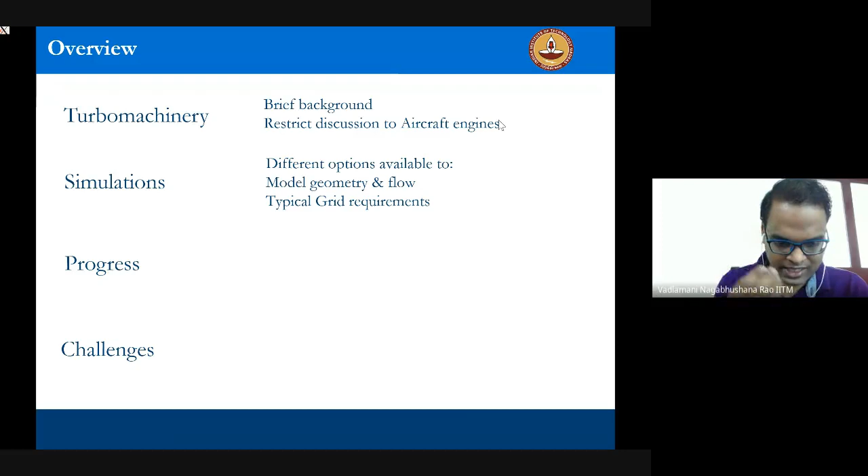Then we have simulations. By simulations we mean computational fluid dynamics simulation, CFD. If you know anyone who works on CFD, there are a variety of options available to us: the way we resolve or model the geometry, the way we resolve or model the flow. There are a variety of options available, and I'll go through some of these options available to you as a CFD practitioner, and the typical grid requirements required for high-end, high fidelity simulations. Let this terminology become more and more clear to you as we go through the talk.

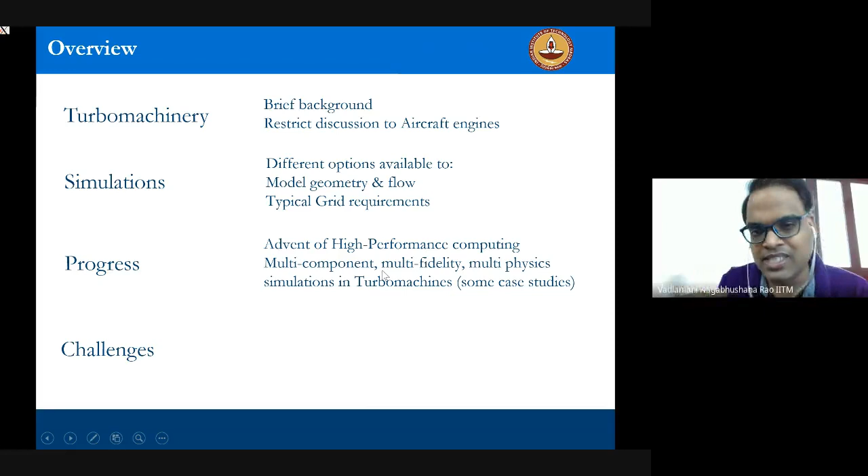In the third section, we will get into the progress in this field, turbo machinery simulations. Over the last 10 to 20 years, there has been a massive boost in high performance computing facilities across the world, and how this HPC has transformed simulations completely. We will also look at some case studies in which I was actually involved, doing hands-on simulations of some of these components. I'll share my experience handling multi-component, multi-fidelity, multi-physics simulations in turbo machines. Finally, there are way too many challenges which we as CFD practitioners, and in the turbo machinery field, face. As we move through all of this, I'll keep addressing some of the challenges, but at the end I'm also going to summarize them. It's a really exhaustive list, and I'm not going to get into each and every detail. So this is the overview of the talk.

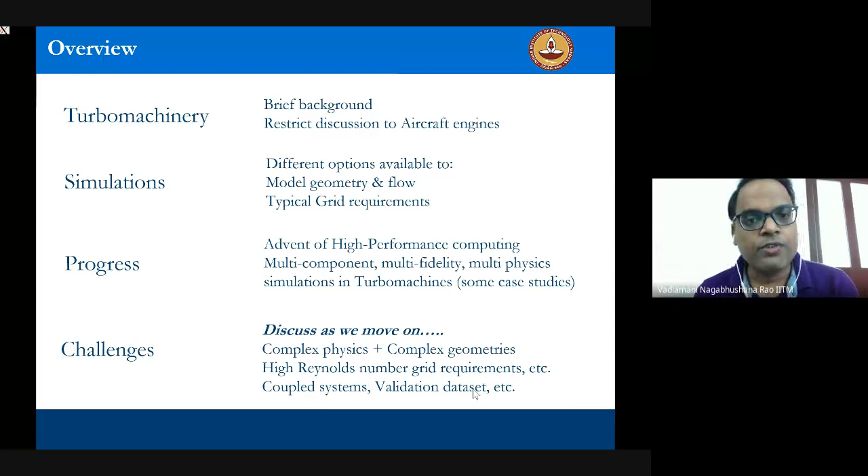So let's start off with a background on turbo machinery.

Yeah. Okay. Right. So you usually encounter turbo machines in a variety of applications.

You usually encounter turbo machines in a variety of applications. The first one you will see, while boarding a flight, is a gas turbine engine installed right underneath the wing of an aircraft. That's a simple aircraft engine. You could also have land-based engines used for generation of power, like a land-based steam turbine - Siemens is the largest manufacturer of such engines. There, weight is not a critical issue since the engine isn't flying in air, whereas in the case of aircraft you should be worried about weight. It should be light enough and still generate the required power. Apart from these applications, you will also see some tidal turbines for renewable sources of energy.

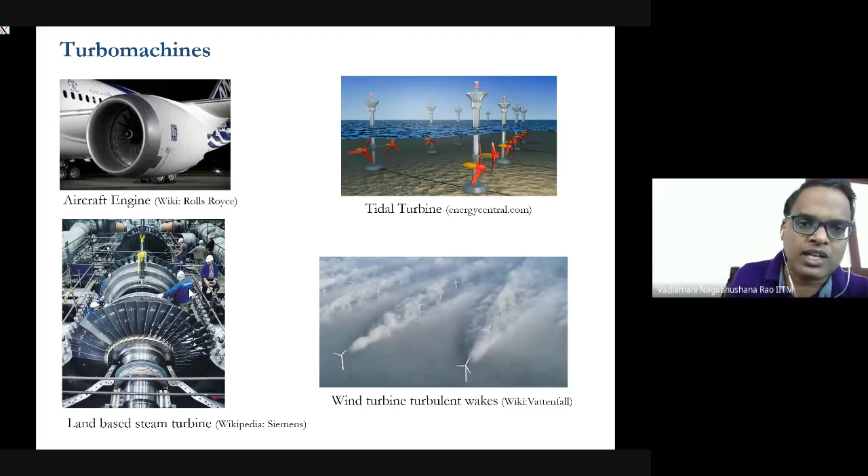There is a massive drift towards renewable sources of energy, with many groups across the world working on tidal turbines to harvest energy. We also encounter wind turbines, and there is a lot of interesting physics involved in how to install these wind farms in open areas. So there are a wide range of applications - this is not an exhaustive list, but just to give a brief idea. Even in the space industry, turbo machines are used for pumping the fuel and oxidizer to the thrust chamber of the rocket. But let's constrain ourselves to discussing the aircraft engine.

If you cut open that aircraft engine, you see a nice outer casing and a lot of rotating components inside. It looks a bit more complicated inside, but to put it simply, the outer casing tries to supply really clean inflow to all the components. This basic engine is simply breathing in air - it breathes around 500 kilograms of air in 1 second, sufficient enough to make a squash court vacuum in a second. The intake up front tries to supply a very clean airflow. If there are some disturbances, they try to die down in that little section up front, such that all downstream components see a clean airflow coming in.

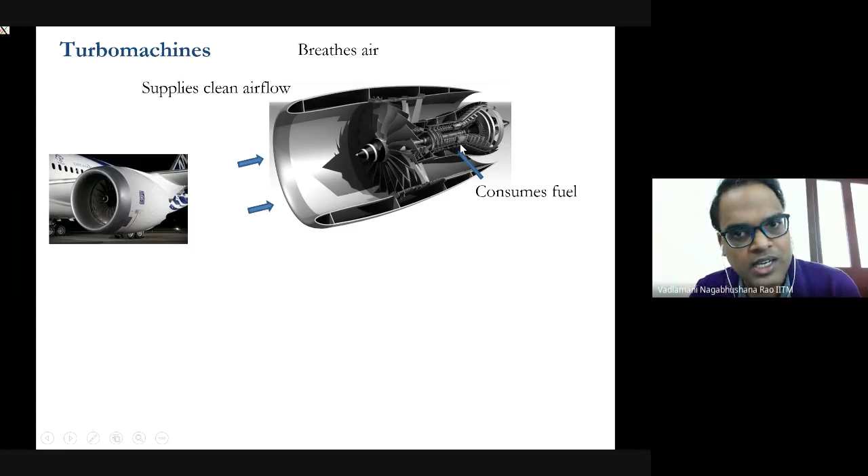Then it also consumes some fuel inside, in the combustion chamber, and we finally extract the energy because we have increased the enthalpy. We convert that available enthalpy into kinetic energy, and we extract that energy. That extracted energy is again used to breathe more air. So looking at the components that do this whole job: the component which supplies the clean airflow is the intake, the component breathing huge amounts of air is the fan, the component consuming the fuel is the combustion chamber, and the component extracting the energy is the turbine.

So for us, the key turbo machinery components are the rotating ones - turbine and fan. These are the key turbo machinery components. And we can't leave the intake alone, because any dynamics happening over this intake will also affect the fan downstream.

The brief background is the turbine is the component which is extracting energy. There is energy already available in the flow, and the turbine is extracting energy out of the flow. Whereas the fan or compressor uses whatever energy is extracted from the turbine, and that fan tries to add energy to the flow. It's very simple - turbine is extracting energy from the flow, and fan is adding energy to the flow.

This airflow passing through this engine is going to affect the performance of each of these components. Someone has designed all these components, and the airflow through this engine is going to affect the performance. As turbo machinery engineers, CFD practitioners, we are all interested in working towards a common goal.

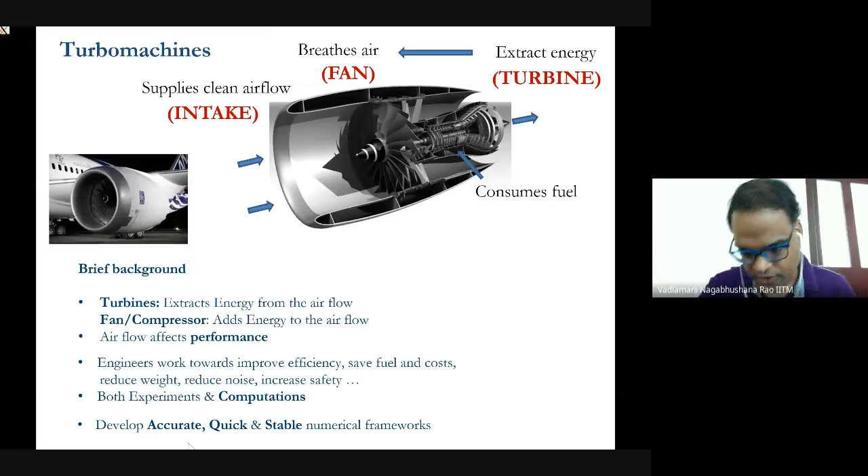That is the brief introduction about the turbo machinery, and what our common objective is.

Now we just talked about the three key important points: accuracy, speed, and stability of a solver, while performing the simulations. These are the three important points. And in this front, let us look at what are the different options available to us in terms of modeling the flow and modeling the geometry.

If you open a tap in your house, you will see that if you marginally open the tap, the water stream which is flowing out is very stable, and it doesn't have too many structures, and it's very well behaved. Or if you are dropping some oil, you will see that the flow is entirely sort of well behaved. So that's a laminar state.

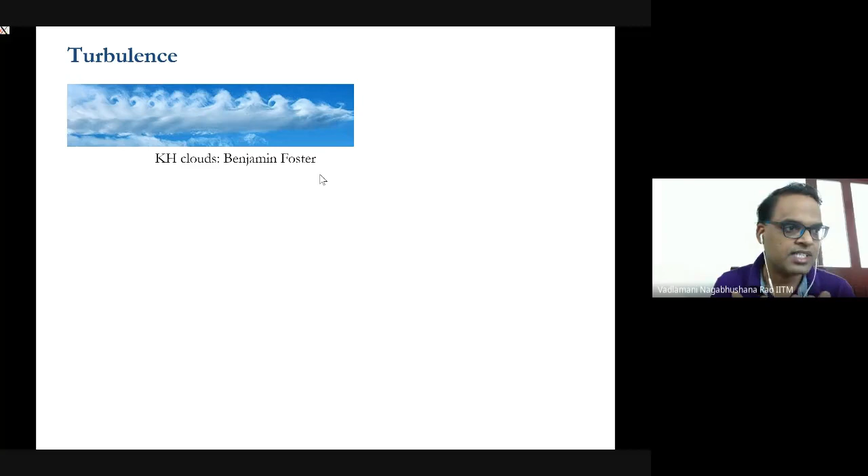However, if you think of an engine which is breathing in 500 kg per second of air - in 1 second, it's breathing in 500 kg - then you don't expect to see too much of such smooth kind of flow going inside the engine. You will see a lot of turbulence which is getting generated across all the components in the engine.

You see such kind of turbulence in nature, for example, clouds, KH rollers across the clouds, or some agarbatti smoke - you see some nice laminar region followed by transition to turbulence. Even a candle plume, where you can see a nice candle plume, which is all laminar, then there is some instability followed by breakdown to turbulence. Also the example of the wind farm I gave - initially you see some structures developing, but after you go further downstream, the flow becomes more and more turbulent.

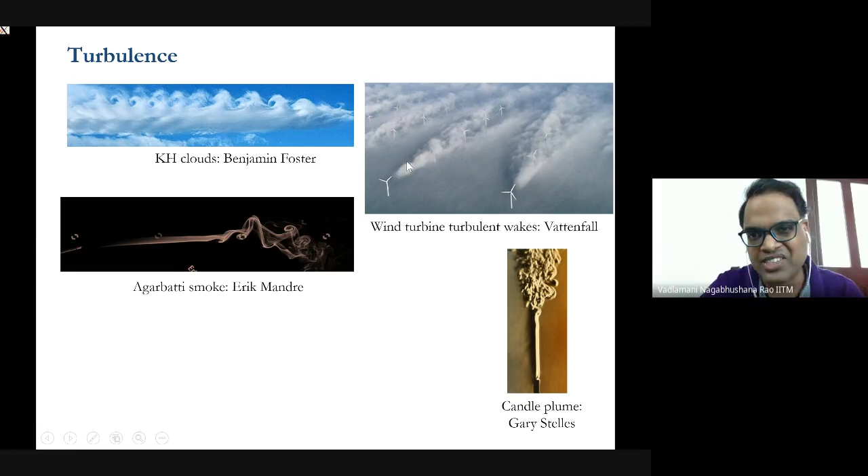Okay, so each of these wakes will interact with the downstream wakes, and it becomes a really complicated flow. So one thing which comes to our mind when we talk about turbulent flows is there is a lot of mixing involved. It's very rich in physics. There are a lot of spatial scales. This is varying very quickly in time, right?

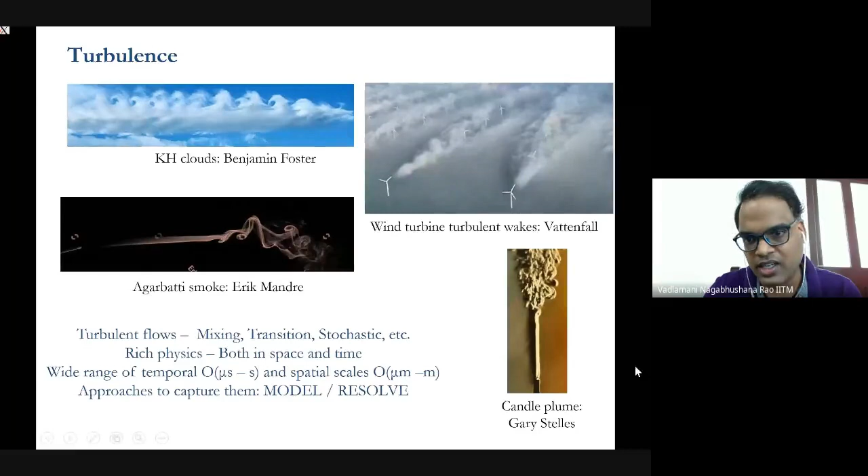So in order to address this turbulence, we have two approaches. One is you can model the turbulence, or you put a fine enough mesh to resolve the turbulence. Okay, so let's look at these two strategies now. And the turbulence, whatever I have shown here, is turbulence encountered in nature. So similar things happen in turbomachinery components. For example, over the turbine blades or on the compressor blades, you see a lot of chaotic flows developing.

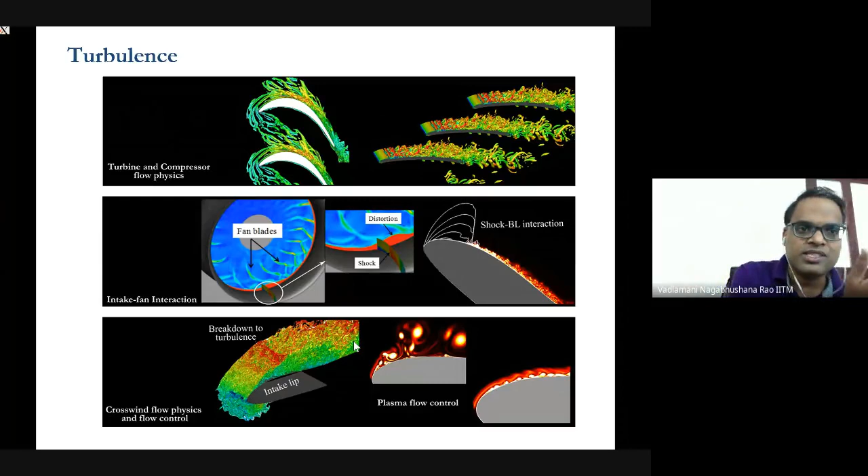Say even on the intake lips and the fan blades, you could have shocks inside the engine over the intake lips or on the turbine blades, right? So you will have shock boundary layer interactions. So there is a lot of interesting and complex physics happening across all these components. And say over the intake lips, you see some massive separations, and again it can generate a lot of turbulent flow. Okay, so the basic takeaway from the slide is whatever turbulence you're seeing in nature, you also see on the turbomachinery components inside the engine.

Now, even for the geometry, right? So

Hello, sir, your audio is not coming.

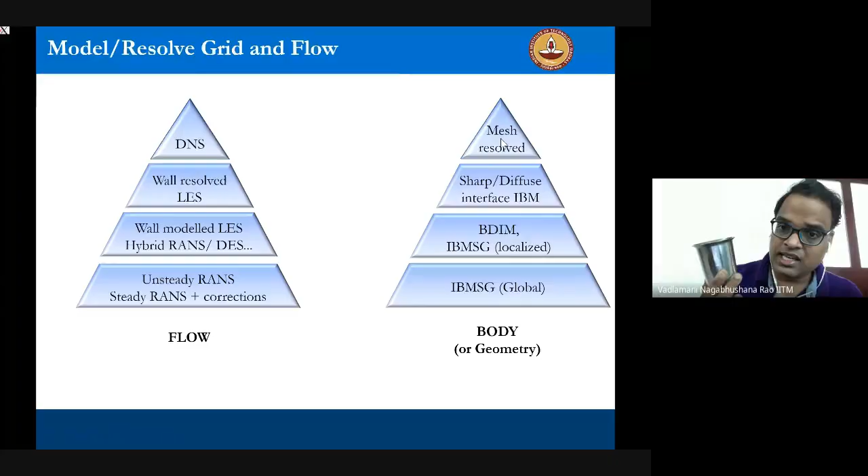Is there some question? Yes, sir. Your audio was not coming in between, but now it is coming. Oh, is it? Okay. Am I audible now? Yes, sir, you're audible. Okay, thank you.

So say, instead of putting a mesh around this glass, I say that there is a hypothetical glass here. And if I have a flow over this glass, we know that the flow should deflect, right? So instead of putting a glass, I can as well create a hypothetical force there, which represents the shape of a glass. Okay, so such kind of methods are called immersed boundary methods. So in turbomachinery, there is one more class which is called IBM-SG, which is immersed boundary method for smeared geometries. So we will look briefly at that interesting class of immersed boundary method.

Okay, but the bottom line is we have different methods for capturing the flow. We have different methods for capturing the body. At the bottom of the pyramid, you are modeling the grid or modeling the flow. And on the top of the pyramid, you are either resolving the grid or resolving the flow. So when you move up the pyramid, you are increasing the accuracy of your final solution. Whereas if you come to the bottom of the pyramid, then you are decreasing the cost of the simulation. So you are compromising; these two are not going hand in hand.

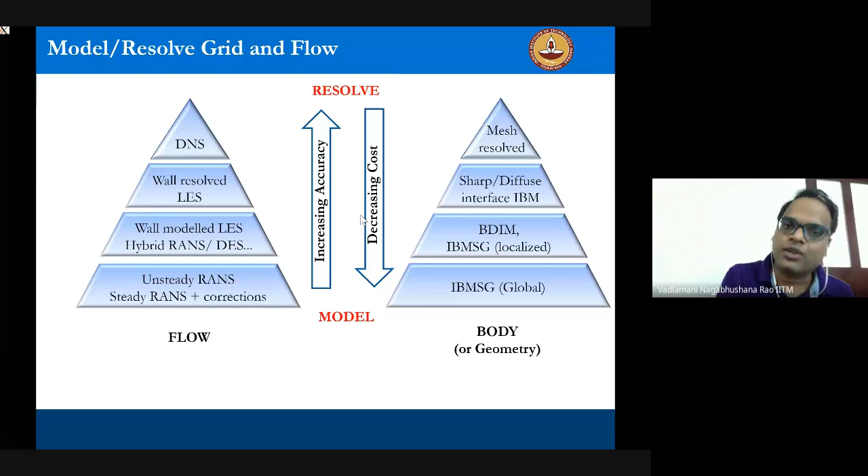Okay. But the good thing which has been researched over the last 15, 20 years is, can we use some different combinations of each of these, right? So I will use different strategies for the flow, different strategies for the body, right?

So can I mix and match across this pyramid? There are a variety of papers. If you go through turbomachinery literature, you will see a wide range of papers which are mixing and matching how they resolve the flow and how they resolve the body. But 20 years earlier, everyone was at the bottom of this pyramid. We didn't have enough computational power to actually hit the top of the pyramid.

So accuracy versus speed, as I mentioned, is a trade-off. For whatever application we are looking at, we should worry about how much I can compromise on accuracy and how much speed I will get. Right. So in terms of the flow, let's look.

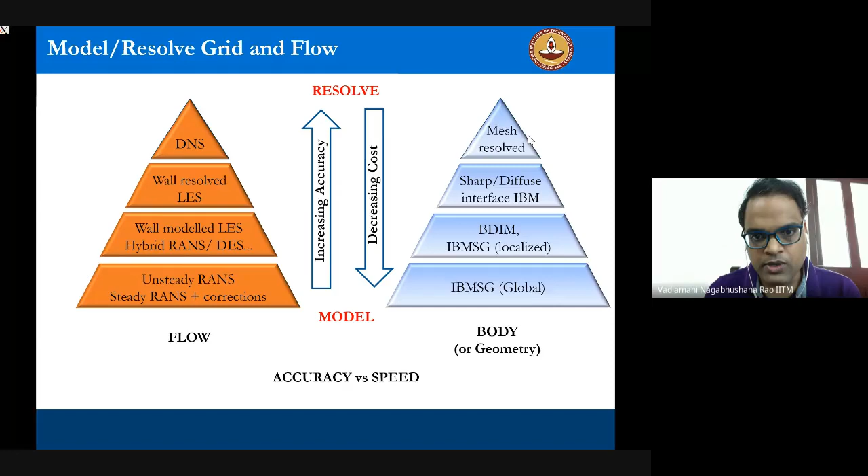Whereas if you say, hey, I don't want to resolve all the scales, I will do some modifications. I will simplify these Navier-Stokes equations, I'll average them, do some Reynolds averaging, etc. Then I mess up those standard Navier-Stokes equations and introduce some new modeling terms. What you end up getting is the steady Reynolds-averaged Navier-Stokes equations, or if you relax some of those modeling constraints, unsteady Reynolds-averaged, right? But you clearly see the distinction: as you move up the pyramid, you are resolving more and more.

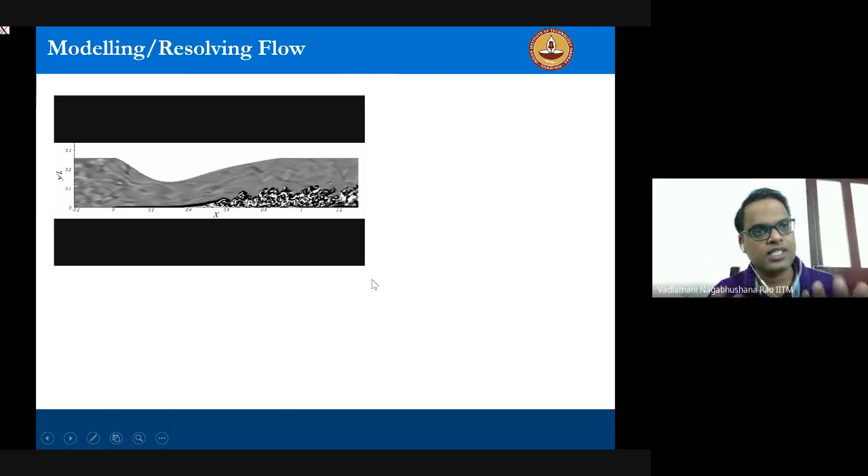So what are all these structures I'm showing here? These are nothing but vortices. On day 2, Professor Samin introduced you to vortex dynamics and how they were capturing some axial vortices. All this turbulence is characterized by a lot of coherent structures called vortices. You can imagine these vortices as a bunch of fish of different sizes. If you want to capture these fish, we simply put a net on them. Similarly, in a turbulent flow, to capture all these vortices you simply put down a fine enough mesh.

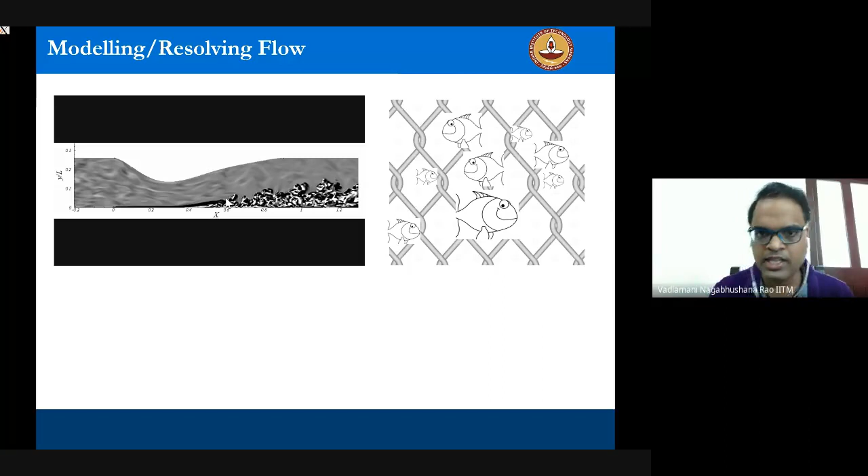Now at each and every point on this mesh, you are going to satisfy these highly coupled nonlinear equations, the Navier-Stokes equations. If you resolve all the fish, up to the smallest size, if you have put a fine enough mesh that you are capturing even the smallest fish or the smallest vortex in your system, then it's called a direct numerical simulation.

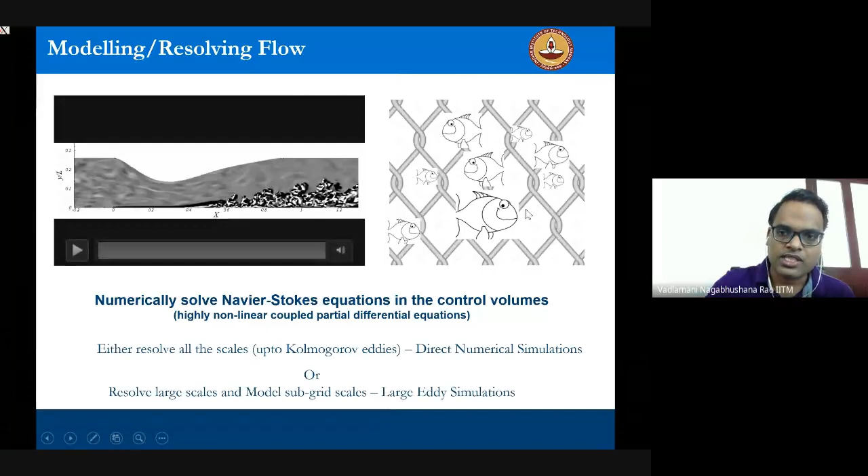If you say, hey, I really don't care about all the small vortices, maybe they are not contributing much towards my accuracy, I would rather capture only the large fish or the large vortices. And I can put in some model which says this much energy is being carried away by vortices which I'm not resolving. Such approaches are called large eddy simulations, where we only capture the large scale vortices, which means the large fish. So this is a brief idea about the pyramid, the way of capturing the flow.

And over the recent years, there have been many tests which have been done from the bottom of the pyramid and from the top of the pyramid, different approaches. Okay. So what they have observed is, this is a simple example of a labyrinth seal used in a turbomachine, near the high pressure turbine region, where they wanted to measure some radial variation of some velocity.

They used so many different models. On the bottom of this pyramid, people came up with so many different models, and this is quite a challenging flow. There are many models, like k-epsilon, RNG, RSM, SST, different varieties of SST. But what you can see is, when compared to the experiments, you see a large scatter in the results. So the reliability, the accuracy, is obviously taking a hit here. And the models, whatever are developed, are not applicable for all the flow scenarios.

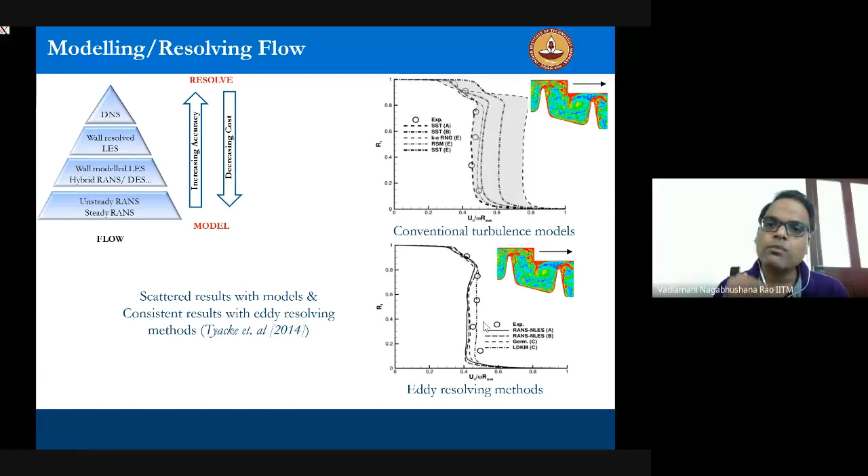Whereas if you are increasing the resolving component, say even if you are going up to wall-resolved LES, you see the scatter in the predictions has decreased. So the community is more and more shifting towards resolving the simulations more rather than modeling. Now, how much can we resolve? Those scales, whatever we are generating, what does that depend on?

That obviously depends on how fast the flow is moving, right? That is quantified using the standard Reynolds number. Reynolds number, we know, is the ratio of the inertial forces to the viscous forces. So if the inertial forces, which means if the velocity or the length over which the flow is happening, is really large, then it is going to generate more and more vortices, more and more turbulence is getting generated.

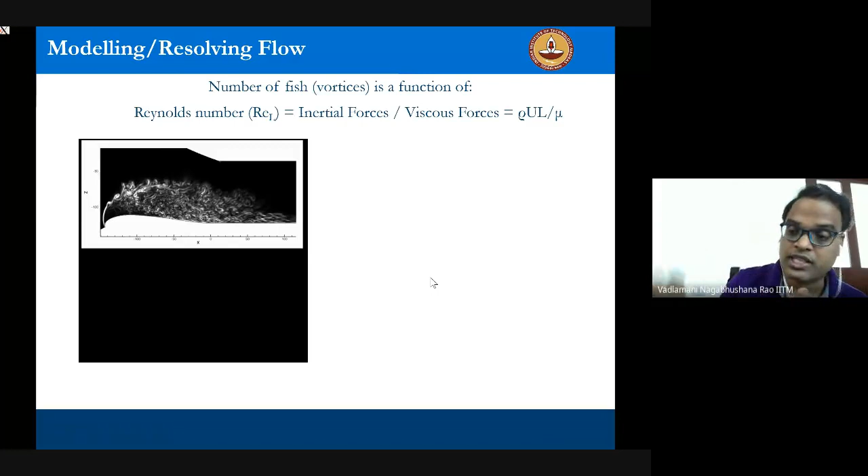So as you are increasing the Reynolds number, the number of vortices which you are generating is increasing proportionally. Higher the Reynolds number, the wider is the range of spatial scales and temporal scales which we have to resolve. And what does that mean? We have to put more and more mesh into it. As a typical estimate, going back to the pyramid, on the top of the pyramid we need almost Reynolds number to the power 2.6 as the total number of grid points to capture the flow accurately. If you are introducing more and more modeling, you keep on reducing this exponent.

Whatever simulation I have shown is only on one little component, and that's where we spend a lot of mesh. But if you want to do some multi-stage simulations where you have a fan, a turbine, a compressor, a combustion chamber, the kind of meshes we are talking about is of the order of 1 billion plus.

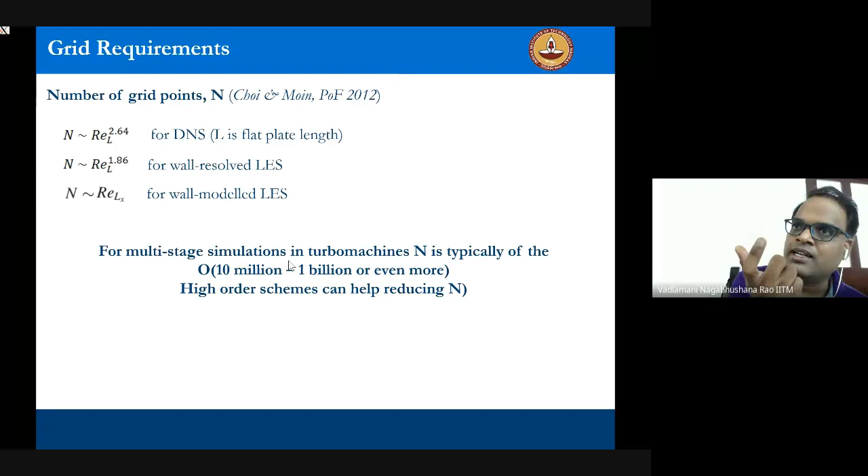And in this situation, when we write a derivative in our Navier-Stokes equation, say partial u by partial x, if I write it as u(i+1) minus u(i-1) divided by 2, that is only giving me second order. If we can make it a higher order stencil, go up to 4th or 6th order, then we can capture more detail using less mesh. That's where high order schemes are getting used in modern day solvers. They want to efficiently use the computational resources to capture these flows, and that's where high order schemes are playing a really big role.

So this n, whatever we have, if you go for high order schemes, can drop further. Now if you look at the grid count which is required for different turbine zones. I talked about the turbine which was extracting the energy. That turbine can be a low pressure turbine, further down in the engine, or it can be a high pressure turbine which is further up, right?

There could be some cutback trailing edges, some cooling ducts, some rim seals or labyrinth seals. So there are different components in that turbine, and each of these components has a completely different Reynolds number.

So the grid count is absolutely different for each component. This plot nicely shows, when talking about different components, as we bump up the Reynolds number, what is the typical grid count needed to resolve the flow accurately. There is an estimate given in literature. I'm not going into the details of how this is done, but there is some sort of reference.

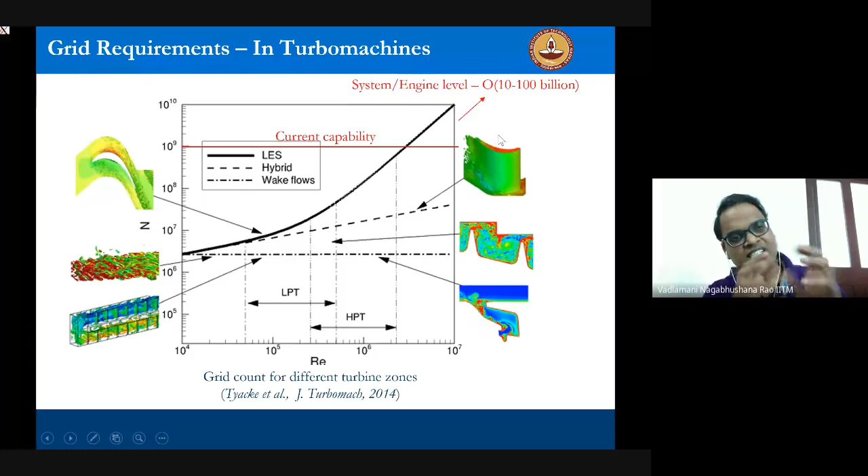This was never the case, say 20 years back. No one would have thought of running a billion cell calculation. But still, with this current capability, we are only able to handle stage level simulations. If you want to capture the entire engine, you're talking about 10 to 100 billion grid points to capture the entire engine in great detail.

So that's all about modeling the flow. Now, when it comes to modeling the geometry, there is this interesting bit called IBM SG, immersed boundary method for smeared geometries, which is particularly relevant for turbo machinery. For example, if there is a fan and you want to know the force field over all the blades, these blades are spinning at a really high speed.

When these are spinning at a really high speed, we can make an assumption that we can consider these blades to be infinitely thin, and the circumferential variation of the force field can be neglected. Under such conditions, I can come up with some axisymmetric geometry. So what does this blade do? It takes the flow axially and turns that flow by some angle, and I should somehow hypothetically create that deflection using a force field.

Which means we are smearing off all these blades - there will be no blade at all. We will not consider any blade, but we will create the effect of the turning by means of some body force. That body force is going to be circumferentially uniform, so whatever force is seen here is the same force seen across any angle. This is called a smeared geometry.

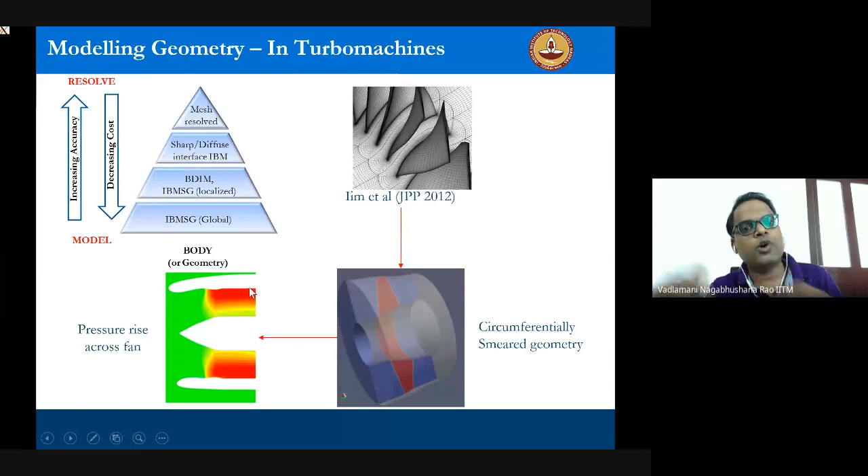So this is one aspect of modeling the geometry, IBM SG. Then the other issue is, all the simulations we currently carry out assume that all the surfaces are absolutely smooth. That's only true when a manufacturer simply deploys the blade - when it comes out of the manufacturer, it's all very smooth, it's amazing. All our analysis, whatever we have done on smooth meshes, is valid for that.

So the current simulations are also trying to look at the effect of this surface roughness on the aerodynamic characteristics of this blade, that in-service degradation. How is the performance going to degrade as these blades keep deteriorating in time?

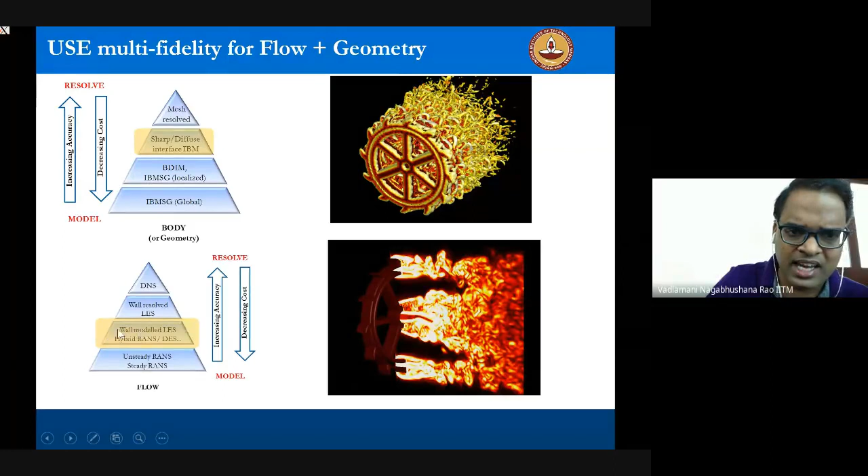And if there are some complex geometries, then you can use something called sharp interface IBM, or you can also go for mesh resolved approaches, where you put a finer mesh around the body. As I mentioned, in this specific case it's a toy case which I tested, wherein I used some wall model LES or a hybrid RANS-LES for the flow, and I used a sharp interface IBM for representing the body.

So you can appreciate the features of the kind of turbulent flows which eject from that whole simple geometry. So that is all about the simulations.

So in simulations, what we saw was what are all the options which are available to us, and how fine the grid which I use for this simulation should be.

Now let's get into the third aspect, which is the progress. So the progress actually started, and it has taken a steep rise in terms of turbo machinery simulations ever since the advent of high performance computing. Parallel computing is the key for the progress turbo machinery field has made in the last 20 years. HPC plays a major role.

So it is not sufficient enough for you to be an expert in turbo machinery alone or fluid dynamics alone. You should be an expert in fluid dynamics, you should be an expert in turbo machinery, and also HPC, which involves a lot of computer science, like how you optimize your solver.

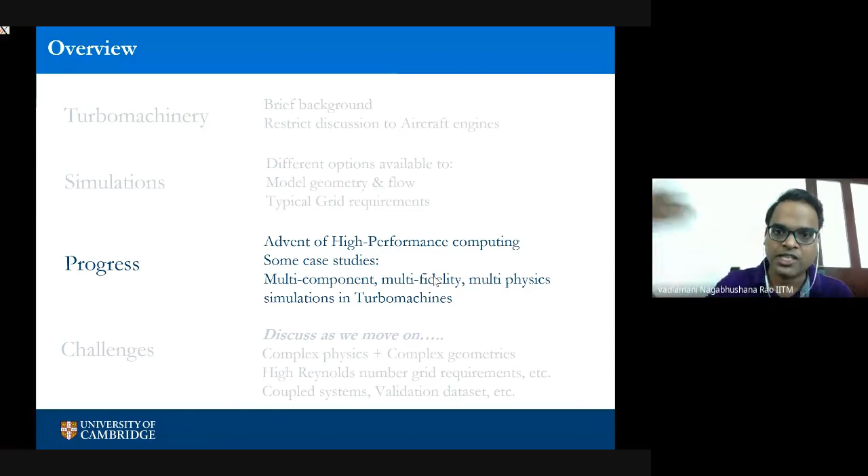So let's look at what happened with HPC in the recent years.

And then you set different boundary conditions on all these boundaries. If you are talking about a billion points, or even say 30 million grid points, and you try to run it on your laptop, what happens? Can you run 30 million grid points and solve all these five equations on your single laptop? Can you? No. Why? What limits it?

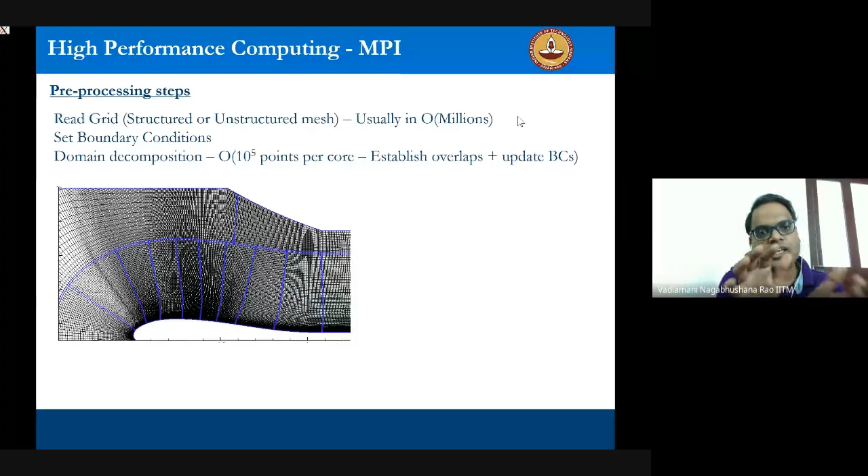So the amount of memory which a computer has to work on, the amount of work assigned to each computer is limited, and that is limited by its memory. And that memory is, according to that, we can split this block. So we create different blocks.

Now if you look at the close-up view of this block, you will also see some overlaps here. We are actually having some ghost cells to get the information. We are peeping into the other block to get some more information and maintain some high order accuracy.

So we are literally splitting, we are domain decomposing. We are decomposing this domain into multiple blocks, and each computer will get its share.

Now what should the computers do? So if I'm solving the Navier-Stokes equations, at some time instance I will stop the flow, I will pause the simulation, I want to see the flow on this. So what should the computers also do? Is it sufficient if they simply compute all the Navier-Stokes equations in just the box assigned to them? Is it sufficient?

No. What else should they do? What is their other job? They should also store the data, across the interfaces, right? So across these interfaces, they have to store the data, and they should also talk. These computers have to talk with each other, saying, hey, this is the interface data which I have, this is relevant to you. And the other processor also says, yeah, I have some information from my end which I have to share with you. So each of these processors also have to talk.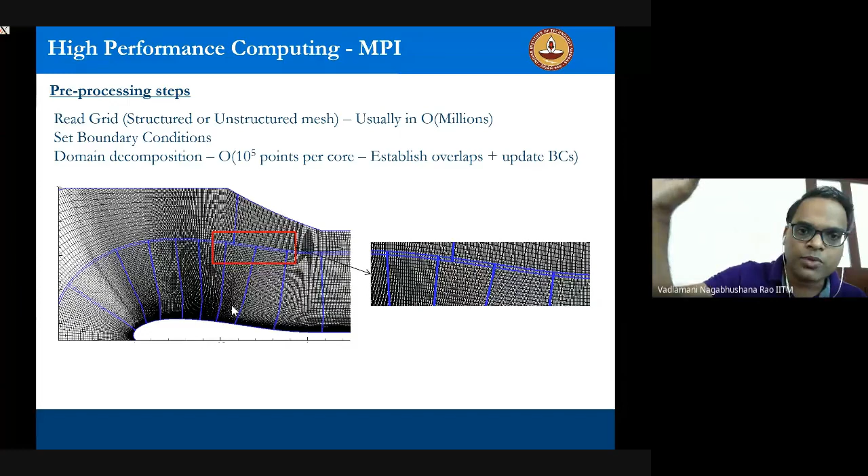So they compute and they communicate. There are two aspects to this. Ideally we will get a good speed up, and we can solve this problem properly. When if this problem is put on a single computer, say if it was possible, then we finish the job in say one day. Now I put the same job on 24 computers, I should expect to get the job done in 1 hour. That is the ideal scaling. But will we get the ideal scaling?

We don't, because it is not just computing. They are not just computing alone, they are also talking. Because they are also talking, if each computer is independent, then it's fine, you will get that nice 24x speed up. But because there is communication involved, you will not get a 24x speed up.

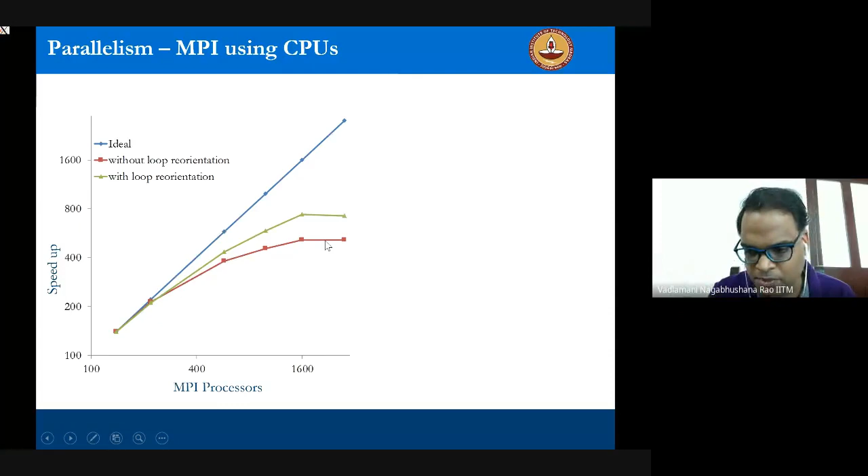So if you take this domain and keep on decomposing more and more, what happens is something like this. Here I am dumping almost 1600 processors for that problem, and surely I'm not getting that 1600 speed up. I'm actually getting only 800 speed up. Where is the other speed up gone? That speed up is gone because the job, whatever computation the computers are doing, has decreased. The amount of talking which they are doing has increased. So the communication has increased and computation has decreased.

So this is the bottleneck which one would hit when talking about message passing interface. This whole process, whatever I told you, is nothing but the message passing between the computers. So you can parallelize any of your solvers using this, but at some point you will end up with this computation versus communication issue.

What is the other strategy? The other strategy is there is one massive memory. I give one big memory, which is a shared memory. All the processors, whatever data these processors require, is put into that memory. So that's a shared memory parallelism.

And one of the really interesting recent developments in this front is the use of GPUs, the graphical processing units. Traditionally, they were introduced for gaming purposes. If you are a really good gamer, you want good graphics, and you would have bought an NVIDIA graphics card. So all that it does is it's a co-processor. When your game is running, it sees it's a code. The game at the end of the day is a source code, so there is a code running in the background.

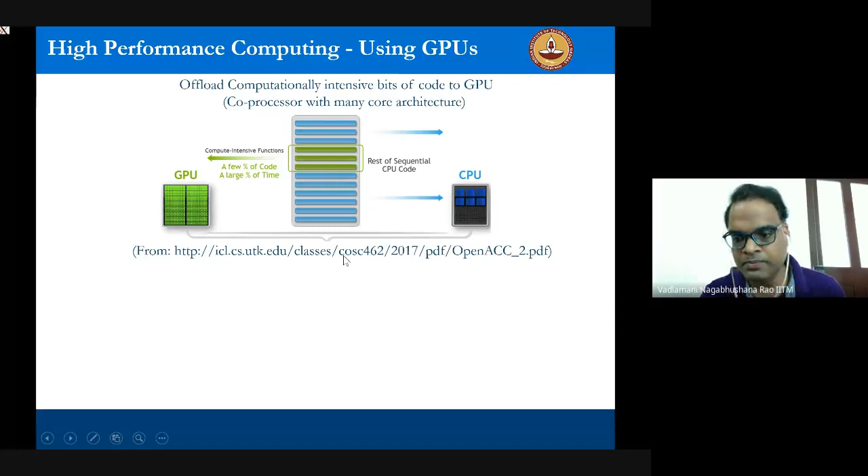But here also we have another issue. The CPU has its own brain and the GPU has its own brain. So the CPU has to transfer whatever is in its memory to the GPU, and then only the GPU will compute, and then whatever has been updated in its memory will be transferred back to the CPU. That's how this whole system works. We don't want too much of this data transfer, because these two are talking, CPU and GPU, too much. Under such conditions, we will hit the performance. There is a performance penalty.

So it's a similar issue which we had in MPI. All the processes at some point keep talking and do little work.

The latest strategies are, the GPU is also limited by memory. You can only put up to some 15 to 20 million grid points, but whatever we are talking about is of the order of billions. So you need more GPUs, and you also need more CPUs to handle them. That's where this hybrid parallelism is one of the recent progress happening in the field, where you use both MPI parallelism and GPU parallelism, and each CPU would be assigned to one GPU.

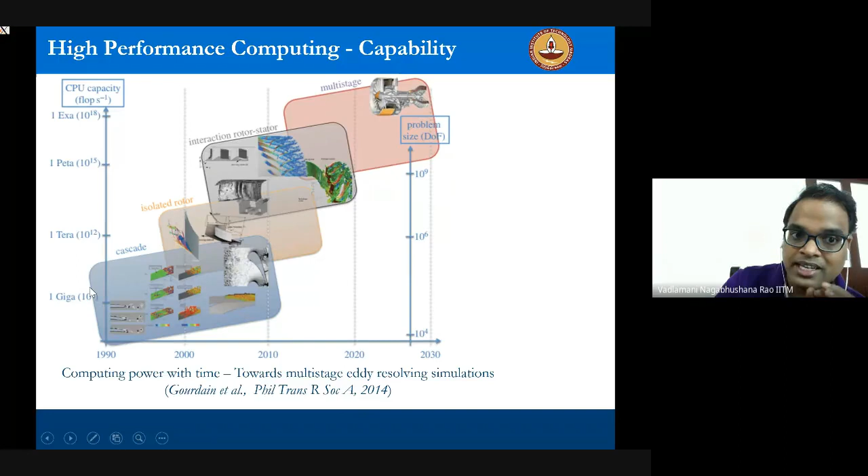Say, once you read the grid, you want to compute the volume of each cell. There are a lot of multiplications involved, a lot of additions, subtractions, a lot of things involved, and each of them is counted as a floating point operation. So this number is telling how many floating point operations can be done in 1 second, and how that evolved over the last 30 years or so.

Traditionally, say in 2000 or something like that, we were only able to carry out simulations in a turbo machine which could handle just a little section of a blade, using some eddy resolving approach. So you are at the top of the pyramid, but with that you can only handle one little section of the blade.

With the current scenario, you can very clearly see there are some rotors, 2 or 3 rotors, 2 or 3 stators. So you have some rotor blades and some stator blades. In turbo machinery, you have some stationary blades and some rotating blades. These two put together is called a stage. So you can at least go up to a single or 2 stage calculations with the current computational facilities.

So 1 to 2 stage simulations, with some rotor-stator sort of arrangement. You can go up to some 1 to 2 stage simulations with the current computing capability which we have, and that is like 10 power 15. So currently we are talking about, say, if you look at the cluster in CDAC, Param Shavak, or that's Kharagpur, I think, but I forgot the name.

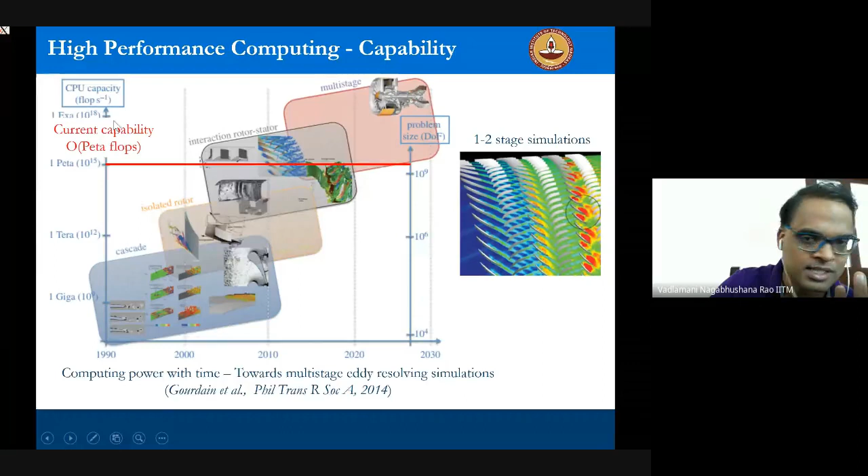And this is still really thirsty - this is our current capability. With this, we are only able to handle 1 to 2 stage simulations. But if you talk about much more engine type simulations, it's still beyond the reach. Even till 2030, we are only talking about exaflop, so a 10 cube increase. But handling the entire full turbo machine requires much more computing power.

So let's briefly look into some of these case studies, where I'll just give you an idea in terms of the progress - this is how HPC has developed, and how I personally used HPC to run some of these simulations is the next part.

In that context, let's look at some of the transitional flows. This is a low pressure turbine flow. And then there is a fan and there is an intake. These two keep interacting - the fluid dynamics happening on the intake can adversely affect the fan, and vice versa. You should also worry about the sound which you generate. So what is sound in terms of pressure?

Sound is nothing but a pressure fluctuation. When you hit something, you are making sound because you are generating some pressure fluctuations. And that pressure fluctuation is what you are hearing with your ear as sound.

So whenever this fan blade is rotating at really high speed - this one up front is the fan blade - then downstream of this engine, you have two stators. This is a rotor, and downstream of that we have two stators. One is a bypass duct, a stator in a bypass duct, that is called the outlet guide vane. And there is a core flow, another stator inside the core duct, called the engine section stator.

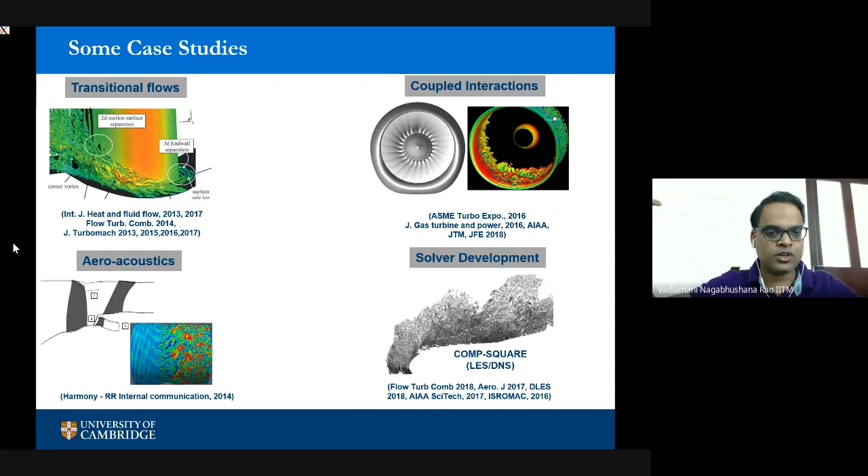So there is something on the aeroacoustics, and finally there is some solver development which we were really actively involved in. So me and my group here are really actively involved in developing this high fidelity solver.

Right, so let's look into this transition in turbines. The first component is the turbine. As you can see, there are so many blades within this turbine, and the weight of this entire engine is almost 6 tons. So you can imagine one engine weighing 6 tons, and you have 2 engines. If it's an A380, you have 4 engines, so you're talking about 24 tons just of the engine weight itself. And of that entire weight, the turbine which is extracting the energy contributes to 30% of that weight.

So almost 7 tons of the A380's engine weight is the turbine itself. And if you want to reduce the weight of the engine, that is the aim - then what should we do? The simple solution is we get rid of the blades. It's like you are an employer, and you want to cut down the cost of the company, so you simply remove the employees.

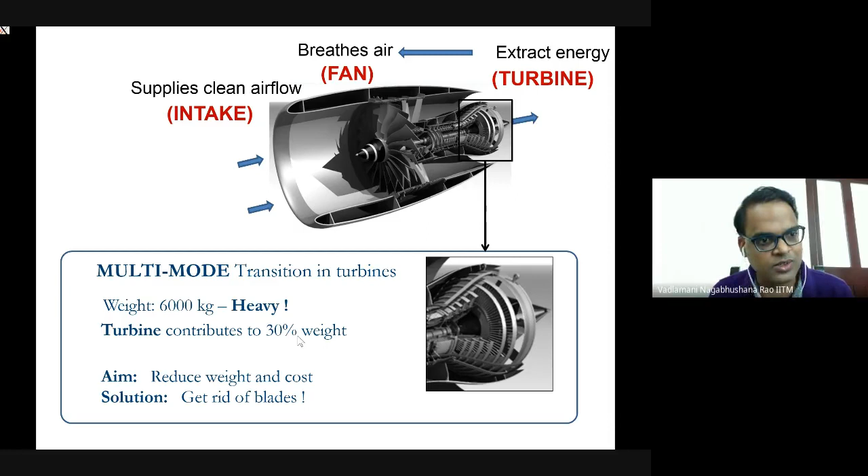So when you do that, what happens? What should you do? Will your company work? It is not going to work because the workload is still the same, right? So then you overburden the employees you currently have, right? So something similar happens in a turbine blade.

So you have some older designs, wherein you turn the flow, and while turning the flow, the change in the angular momentum is converted into the rotational kinetic energy, right? So Euler's equation. I'm not going into the details, but the whole idea is when you turn the flow, you are extracting the energy, you are decreasing the enthalpy available across the flow. You are extracting the energy from the flow and converting it into work. So you are producing work, you are rotating the turbine, and this turbine is connected to the fan up front.

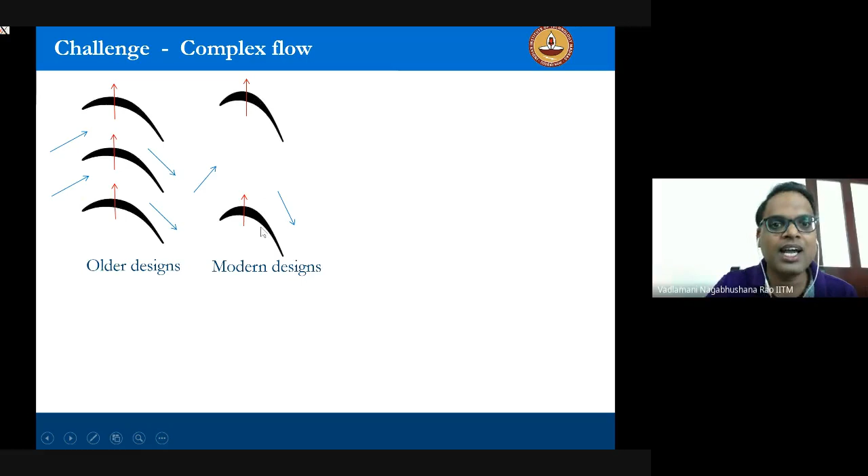So the older designs, you can very clearly see they used to turn the flow to some extent, whereas the modern designs, these blades are much more steeply turned, okay? Which means they are trying to extract more work out of the flow by turning the flow much more. So these are called highly loaded blades. And obviously, if you overburden an employee, what will happen? He is going to break down at some point, right? So something similar happens in

So now what can we do? We have to give some incentives, we have to give some energy to our employees so that they can handle this sort of load, right? And please note that this turbine blade is somewhere further downstream in the engine. It is not the first component which the flow is seeing. So you will also have so much turbulence generated by upstream components coming and hitting this. You will also have rotor or stator wakes, all those things coming and hitting this blade.

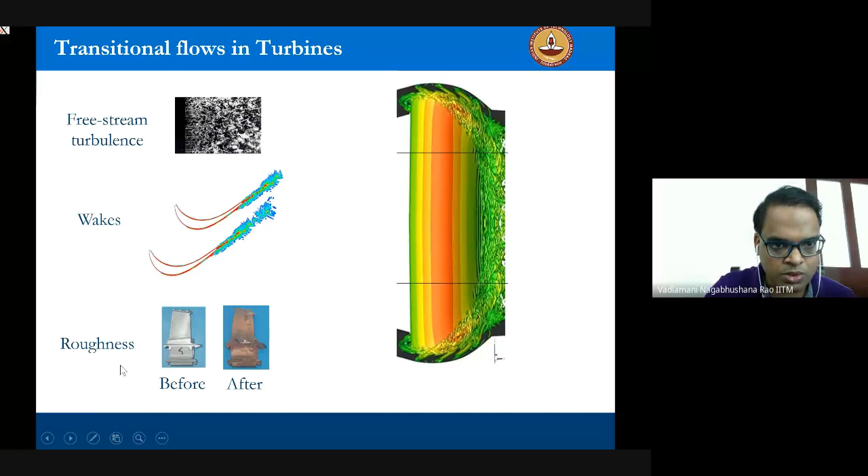And as I also mentioned, when this turbine blade is deployed, it is very smooth, whereas with time it degrades, right? So there is surface roughness. So you have all these three affecting this turbine blade. It is not just the problem of flow separation and transition to turbulence, but also the effect of all these upstream disturbances coming and hitting this, and even the in-service deterioration of the blade, which affects the flow.

So now, how can we run just this blade, and how can we account for all these effects? How do I know how much turbulence is actually generated by all the upstream components? I didn't simulate it, right? I am only looking at one blade, and I don't have any idea how much turbulence is generated by all the upstream components. So that is still a challenge. We are talking about some progress, but as we move on, this is one of the challenges.

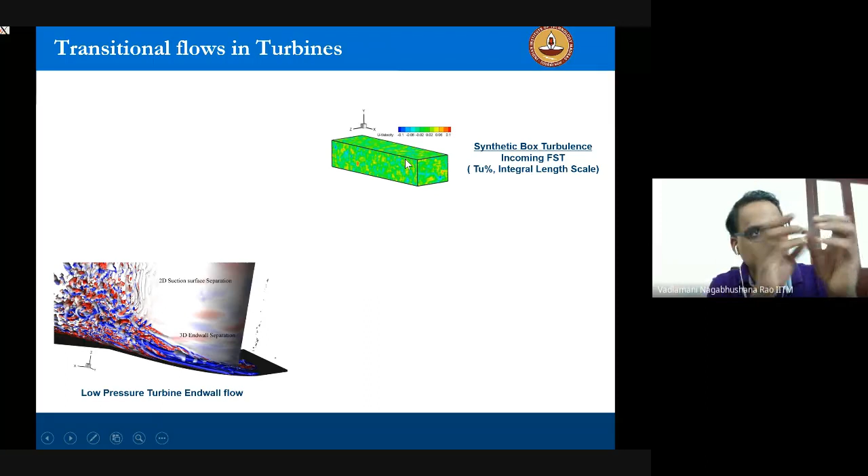So the current state of the art ways are to synthetically generate some of this incoming turbulence. You can use some probability functions. This is called synthetic box turbulence, wherein you give some value of turbulence intensity, and there is some turbulent length scale over which these fluctuations have to be generated. If you simply give random noise, it's not going to work, because turbulence is not random. There is very well correlated data. If you look at the structures, they have some correlation. So that's why we need good tools for generating even these inflow conditions, so you can generate some incoming free stream turbulence.

You can also generate some turbulent wakes synthetically. So these are like some precursor simulation in some little region, where we are going to simulate how the flow could have been, how it would be before hitting this turbine blade. It's a guess.

And all that we have with us is some of these parameters, some wake deficit, like the wake width. So you have some parameters, and you have to generate that correlated data from that little information. And this is still a really active area of research.

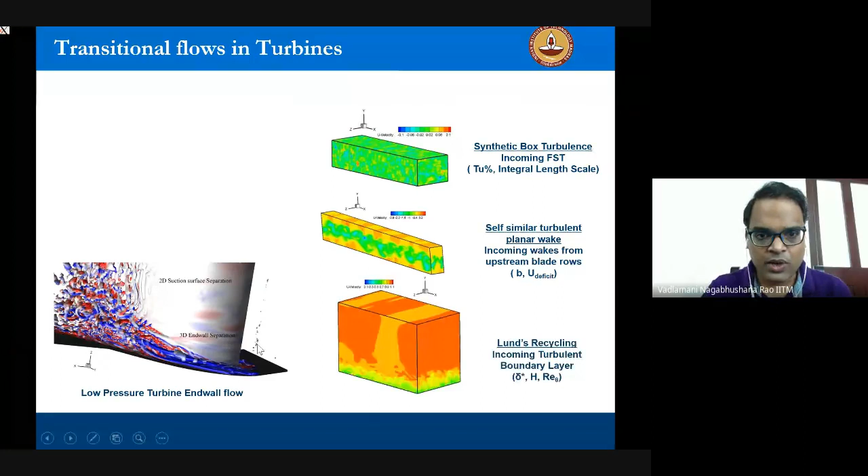And you can also have some boundary layer developing on this plate coming and hitting this blade. So to just put it, we have all these three: we can have some turbulent boundary layer, we can have wakes, and we have some background free stream turbulence, everything going and hitting that blade.

And we also want to ensure that the inflow condition is right. And for that, you do some very simple cascade tests. In experiments, people are not going to have an experimental setup for the entire portion upstream of the engine.

So they would simply put some sort of moving bar mechanism up front. So some cylinder which keeps on moving from top to bottom, which will shed the wake. So that cylinder itself is the representative of an upstream rotor, so it will generate that effect.

So all that we can do to check if the CFD simulations we are doing are right or not is to set up miniature, small scale experiments and see that our simulations are doing a good job. Then use this validated solver to explore more and more parameters. So that is the typical chain which we are actually following.

So these were some of the measurements done by Dr. John Coull in Whittle Laboratory in Cambridge. He was an experimentalist, and he carried out experiments. I carried out the corresponding simulations for this. So we can clearly see that as the wake is passing, we see the decrease in the velocity, we see the increase in the turbulence, as the wakes are moving upfront.

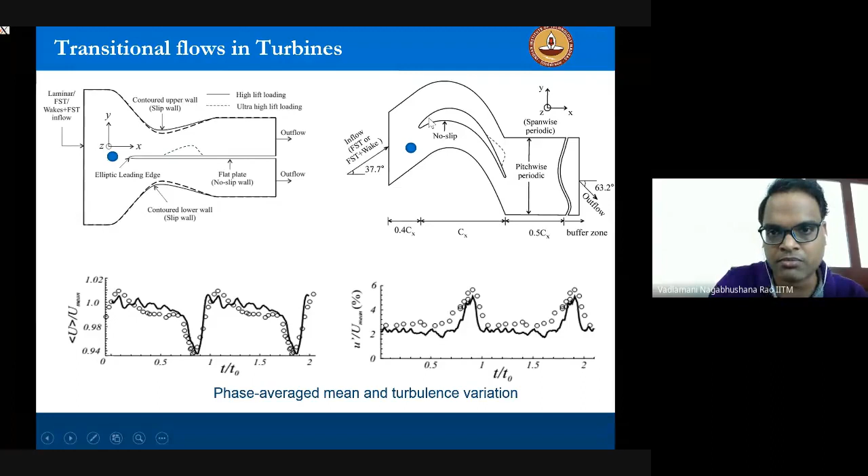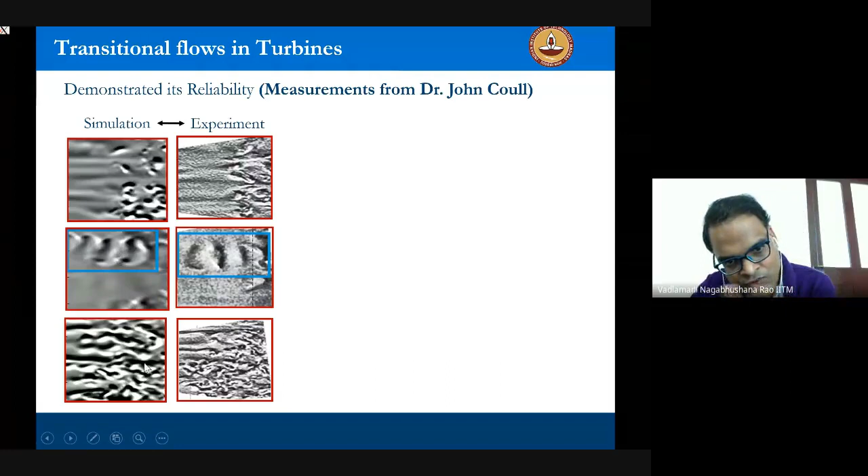There were some pressure taps which were used to monitor the velocity distribution, pressure distribution over the plates and the blade, etc., and how the losses downstream of the blade were varying with time also. So the basic idea is the numerical framework is validated against the experimental data.

So you can very clearly see the same sort of thing happening over the turbine blade. Here, we have a turbine blade and we have a laminar flow. There is a little flow separation. There is this transition to turbulence. These are the Kelvin-Helmholtz vortices, and then there is a full turbulent flow.

And this is the wake disturbance coming and hitting. So that wake disturbance is traversing. This whole coherent structures are gone. And then once the wake is gone, it gets back to its original flow. And what happens in terms of the bubble? So there is a separation. So here,

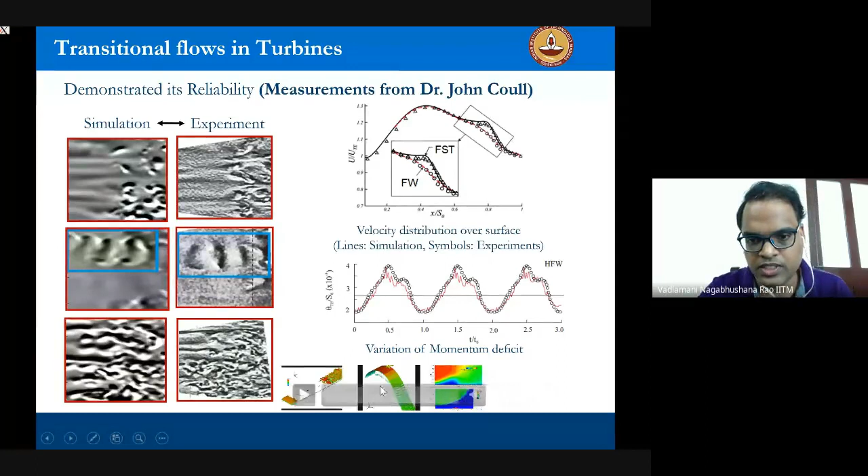Yeah, so I think this is not playing in full screen for some reason.

Okay, so what you can see here is as the wake is passing. So before the wake passes, the bubble is large. But as the wake is passing, the turbulence from the wake trips this bubble and the bubble entirely suppresses. Okay, so it becomes really small. And then, once the wake has passed, it again regains its original size back. So that is what is happening in this process.

And the bottom line is if you didn't account for any of these upstream disturbances, you would say that the bubble is this big, okay? And the losses you will predict from the turbine blade are so huge. But as you keep adding more and more realistic features into it, say free stream turbulence, roughness, and wakes, then this is the size of bubble which you would actually see in an engine. So it is very, very crucial to mimic the kind of conditions which this blade actually sees in an engine.

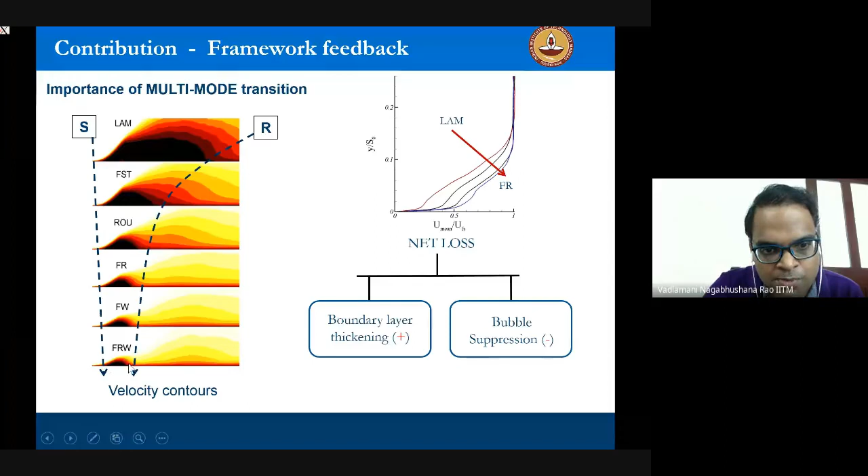Okay, so what we see from this is the total loss you generate downstream of this blade is the momentum loss, right? So you are actually tripping the boundary layer much earlier because of all these disturbances. The boundary layer is getting tripped early, so the boundary layer will be thicker. So that is where you are losing the performance, but you are gaining the performance by making this bubble shorter. Okay, so there are two things. One favors you, the other is not favoring you, right?

But in the case of low pressure turbine blades, we see that whatever benefit we get from the bubble suppression is much more than just this boundary layer thickening. Okay, so in fact, what the study also shows is, if there is a little bit of roughness upfront, it is actually helping. In the context of these high lift turbine blades, that roughness literally acts like a trip and it can eliminate the separation.

So our concern was we had a big separation, right? So the modern design had a big separation. But if you had an as-cast surface blade, you don't want to polish the blades way too much from an aerodynamic perspective. I'm only talking from an aerodynamic perspective. So if you make it really smooth, then you lose that little benefit which you actually get from roughness in terms of suppressing the separation bubble.

Okay. So we clearly have shown, and the experiments also confirm, that this roughness actually helps in the context of high lift, low pressure turbine blades. But surely roughness will not help you in the case of high pressure turbine blades. So you should use some of these results carefully. This is not a universal result. In a specific application, you see the benefits.

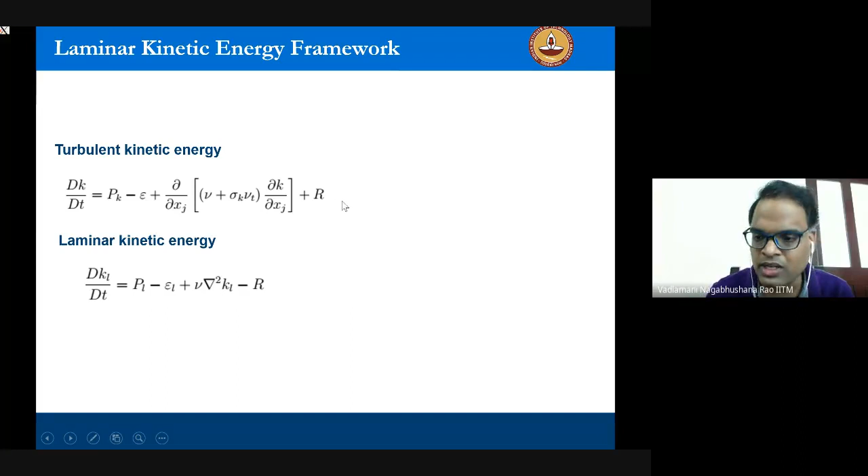Right. And now, we have generated all this data. How can we utilize that in the bottom end of the pyramid, right? So what we have done is resolving turbulence. But on the bottom end of the pyramid, we can model the turbulence. So if you model the turbulence, if you simply use the K omega model and do this problem, you will see a massive separation bubble, or based on your inflow condition, it will be a simple attached flow.

Whereas what the LES gives you is this. This is the size of the bubble. A K omega model can predict a massive bubble, or if you use the fully turbulent condition, it will just give you an attached boundary layer. Whereas now you can use the information. So this is missing all the streaky structures, right? Up here, you see this green bit. That is all coming from the streaks, whatever the upstream disturbances have generated. So that is entirely lost in this model.

Okay. So because now we have this high fidelity data, we can also come up with some different fancy models like this laminar kinetic energy, where we gradually take this minus R, taking the energy from the laminar portion and adding that to the turbulent kinetic energy.

So that gradual transition is going to happen. And that is what you are seeing, that we are actually getting back that green bit and we are again regaining the size of that bubble, etc. So, obviously, this LES, as I told, in terms of accuracy, it is great, but it takes a week to run. Whereas this laminar kinetic energy approach, once you use that LES information, it takes only half an hour to run.

So this is one little case study. The other case study is, say, the intake fan interaction.

The modern aircraft architectures are all going towards high bypass ratio. If you have really high bypass ratio, it means you make this diameter much larger. It is obviously good from a propulsion perspective, because you are breathing in more air, and the amount of delta increment, like m dot v, that thrust you are going to generate is going to increase. There are obvious benefits in terms of fuel burn, and it will reduce emissions, noise, etc.

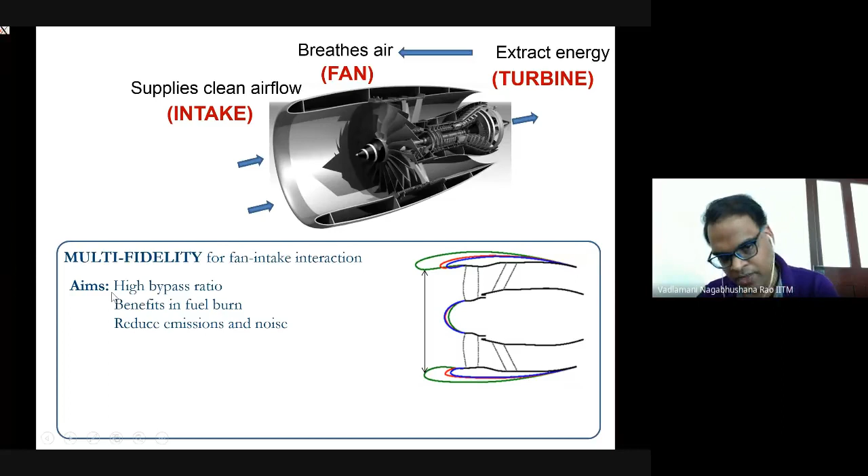However, on the other hand, because the engine is much larger now, the weight is going to increase, the surface area has increased, which means the drag on the surfaces will increase, right? So there are a lot of other issues.

So in order to minimize these issues, the modern engines are trying to cut down the length of the engine. This green is the modern engine intake, and that blue and red are typical candidate engines which you might see in the future. You can very clearly see we are cutting down on that area - we are reducing the length of this intake.

But what is the problem? This intake lip is getting more and more closer to the fan, right?

So we have this intake lip, but there is not enough room for the flow to stabilize and the turbulence to come down and then smoothly get into the fan. So this intake aerodynamics is going to very tightly get coupled to how the fan behaves, the fan performance. And on the other hand, the fan also has an impact on how the intake dynamics actually behave. These two are now way too close, okay?

And the solution is basically to make this shorter and the lips slimmer. However, particularly during takeoff, we can have some local shock and there is a massive separated flow. Once the separation is there, separation is always bad for the downstream components. We want to avoid any unwanted separations upstream.

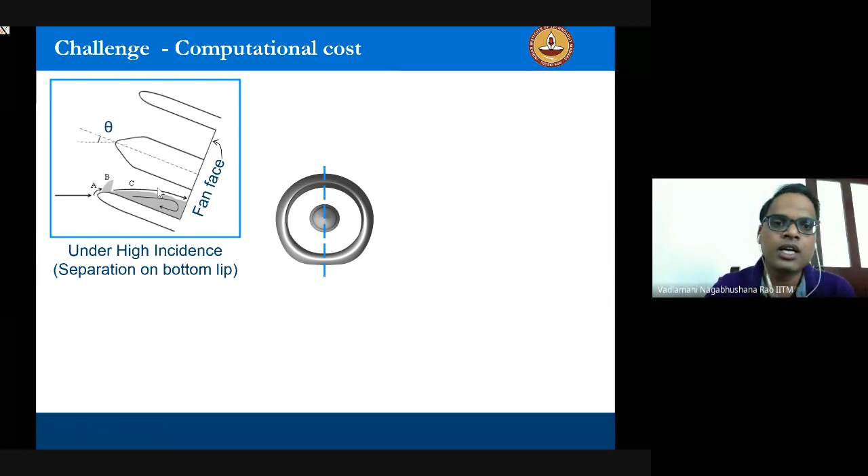So that separation basically hits the fan face. This is under high incidence. And under strong crosswinds, you will have separation on the side lip, right? So if the flow is coming like that, it's not that the flow will always come straight, okay? There can be a component to that. So if the component is basically higher, which is in fact the case, like during high incidence, during takeoff...

The engine is at some angle, right? And then under crosswinds, you can't predict crosswinds. So during landing or during taxiing, you can have severe winds blowing, right? And there can be separations happening on that side of the lip. And whenever these separations happen, this can go and hit the fan and they affect the performance.

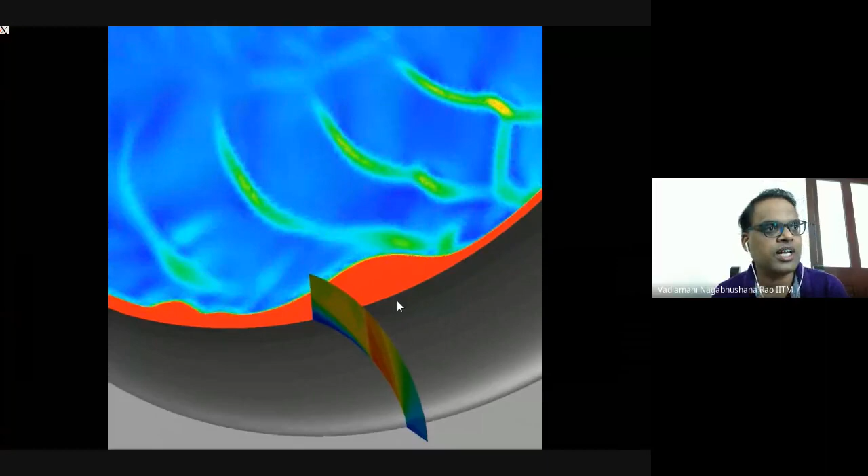So in order to capture this sort of thing, you can always run full 3D simulations - this is an unsteady RANS simulation. This was run on some 150 million grid points for almost 2 weeks or so, okay, and on order of 1,000 processes. So you can very clearly see this shock, and then there is a separation. This is the whole distortion. That's the fan blade effect, right?

And there is a paper which we have published which talks about all this interactions and how it deteriorates the fan performance. But the idea is, this is taking almost 2 weeks, and such kind of simulations can't be used for designing the components, right? So we need some sort of economical design to optimize this intake shapes. So that's where whatever bladeless approach I have come up with, right?

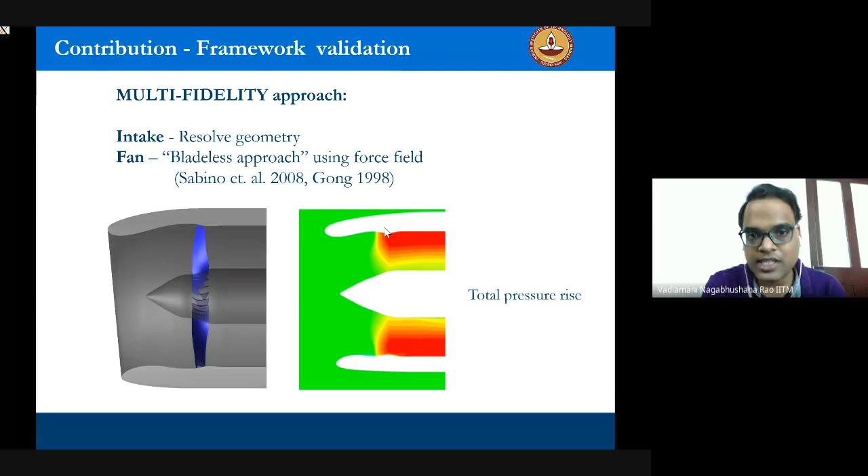So whatever I introduced previously, in one of the slides, is IBM SG, the immersed boundary method for smeared geometries. That kind of approach can be used where you are not going to resolve the fan. You are only going to say this is the typical deflection the flow undergoes once it hits the fan. So that's basically what IBM SG is giving.

So again this is some validation against experimental data. Now if you look at the total distortion at this fan face, there is a separation, a flow separated here. If you cut this plane and look from this end, you will see this as a circle. So you have this annular sector where you have the entire loss of stagnation pressure. Stagnation pressure loss is always bad.

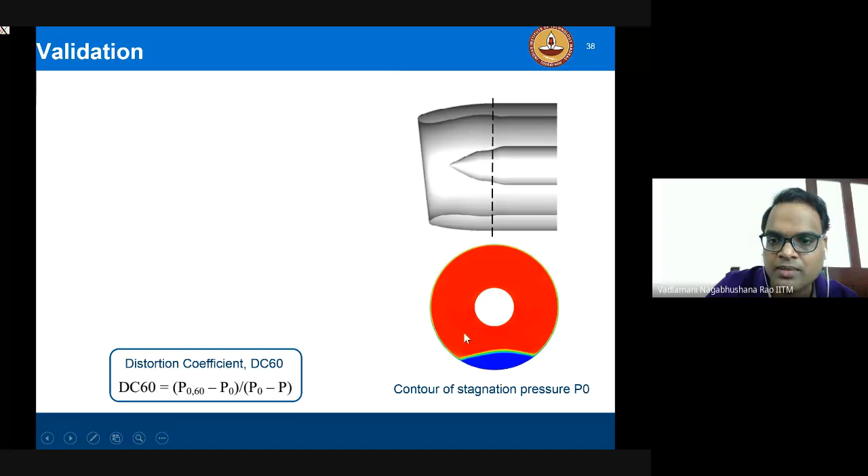So this stagnation pressure loss keeps on increasing as you increase the angle of incidence. Here and all we have attached flow. This is one parameter which says how much blue it is, how much loss in P naught we have. So here the aircraft is taking off at a smaller angle of attack, and until some angle of attack, it's all fine, all very small loss.

But all of a sudden, if you further increase the angle at which this flies, the shock becomes strong and it becomes massively separated. That is what you are basically seeing here. All of a sudden, at this angle of attack, you see a huge loss which is generated. Before this, if you take a point here, this blue region would be very small, so there would be nothing actually.

So now this is an intake alone calculation, just the intake only calculation. But if we look at the coupling between the fan and the intake, then we see that this distortion has decreased. Because of the fan effect, the distortion actually decreases. And this is a bladeless calculation.

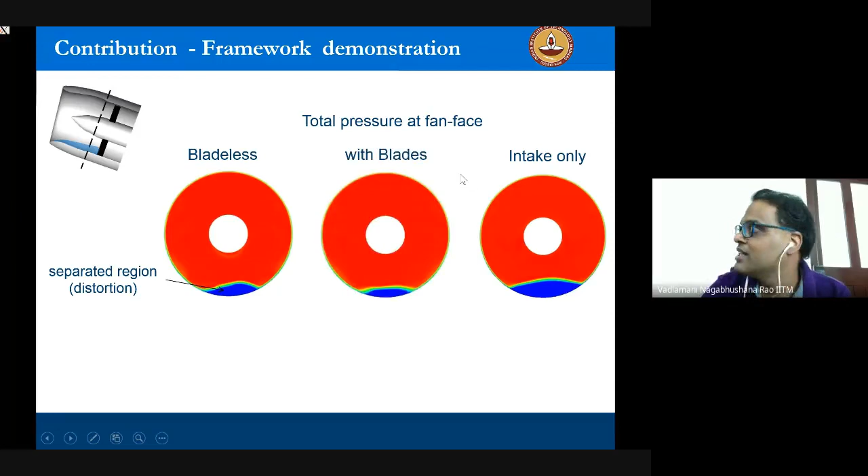The same thing, if we run it for 2 weeks, that full animation I have shown, this is the solution you get with blades. So this bladeless approach, using immersed boundary method for smear geometries, runs in 2 hours, whereas the full unsteady RANS simulation is going to run in 2 weeks.

So this is our design tool now. Once we have this kind of design tool in place, we can play around with it. I have an intake here, there is no fan here. I can place the fan anywhere I want, and in a day it's done. I get the full distortion plots. So I say when it's intake only, the distortion is much higher, whereas as I bring the fan closer to the inlet plane, I'm actually clearing off the distortion.

Of course, on the other hand, the fan performance is getting affected. That also we can get an idea of from some of the simulations.

So now the other simple case study is this control. I was interested in whether we can control some of the separations. In order to check that, here there is a low speed separation, all low velocity. Separation is characterized by low velocity, you have reverse flow, a negative velocity. But what if you put a device here which is going to energize that low speed flow?

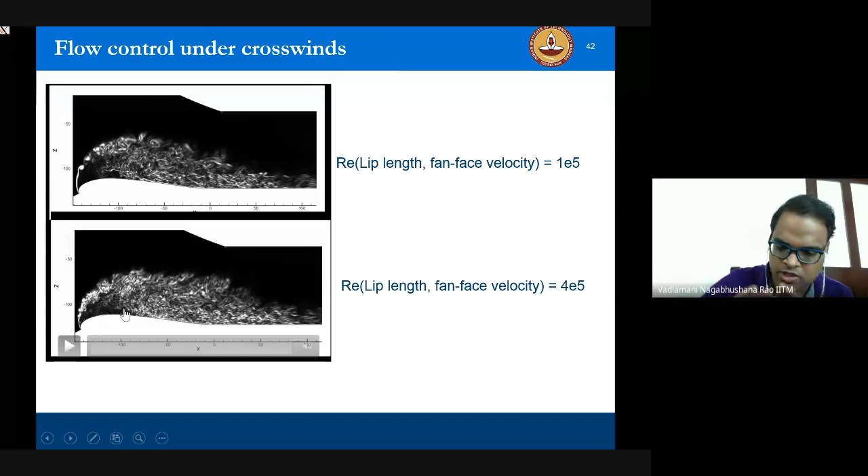It is going to push that flow. It is going to generate a forward, high velocity flow, which is going to clear off that separation. So if we have such a device, can we suppress this separation? That is the idea, and plasma is something which can do that.

So it's an electrode setup. You have 2 electrodes with some dielectric separating them. When you give some AC voltage, you generate plasma, and this generates some body force. So with this simple setting, you can generate a body force.

There are a variety of approaches to model this plasma, with some source terms, etc. Let's not get into details. But one important quantity you will encounter, like Reynolds number which is inertial to viscous force, there is an important non-dimensional parameter called DC, which is the ratio of how much electricity you should give to how fast the flow is - electric force to inertial force.

So now it's a CFD simulation. I simply played around with that number. Oh, I don't think this is playing. Sorry about that. Okay, so this is not linked.

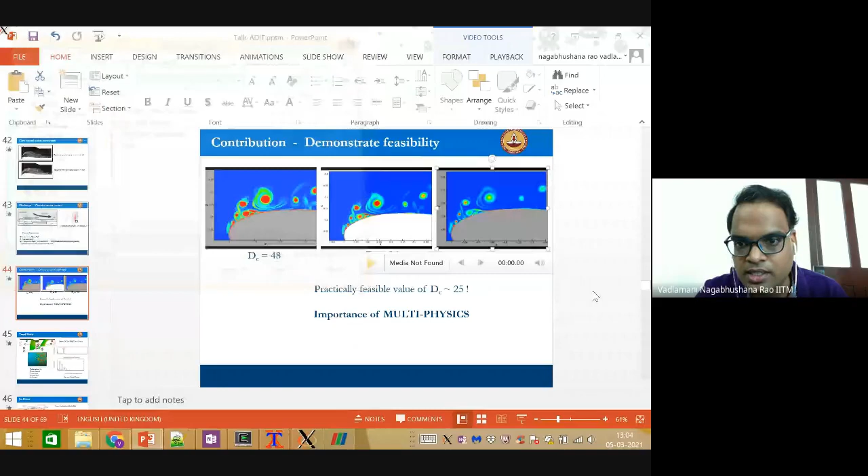Sorry about that. But what this animation is supposed to show you is as you keep increasing to 48, you should have seen a very simple, attached flow. Let me go back to one of the slides.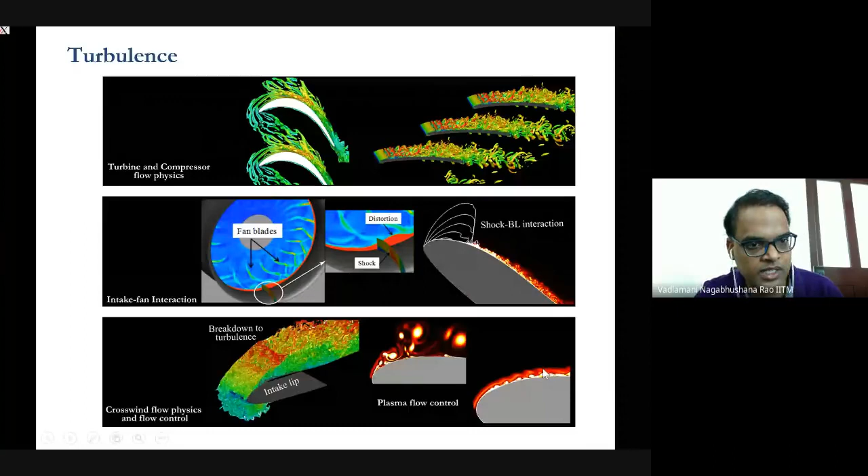You see this plasma flow control. Initially, at low values of plasma, you will see much higher separation. Whereas once you inject more and more plasma, it becomes entirely attached. That was supposed to be an animation, but it didn't work. It's fine. But in CFD, I can keep on increasing that parameter, not a problem.

But the practically feasible value is only 25. So this is way beyond the reach of experimentally making this actual thing work.

I told about the tonal noise. Whenever the fan wake comes and hits these blades, you generate noise in all directions. You will also generate some interstage noise, etc. So again, you can run some massive simulations

which use high performance computing, and then you put some probes to collect the pressure signal. You take some FFTs of the probes. So you put probes upstream of the rotor, downstream of the rotor, in the bypass duct, in the core duct, within this interstage region. You can put so many probes in the simulation.

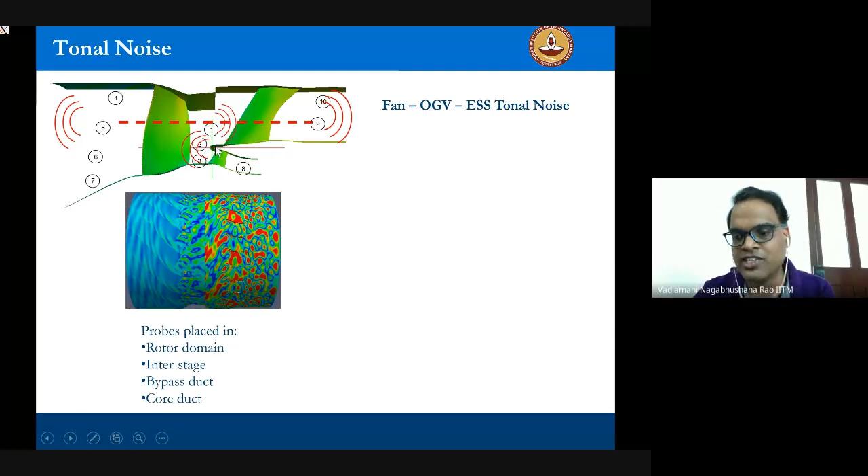You get some pressure fluctuations, and from that you can get what the pressure fluctuation is like, and convert this pressure fluctuation into sound level. So you can predict such kind of tonal noise, and you will see very distinct peaks, because the number of rotors are fixed.

So the number of wakes which are coming are fixed. It's everything like a tone. If I do tuck, tuck, tuck, tuck, you are actually hearing a tonal noise there. If I do zzz, sort of sound, that's a broadband noise. So in tonal noise, you will see these very distinct peaks in the frequency.

Whereas the other important component of noise is the jet noise, wherein you generate a lot of shear layers downstream of the nozzle of the aircraft. So you see a lot of shear layers, and there is a lot of turbulent mixing happening. There is so much of mixing.

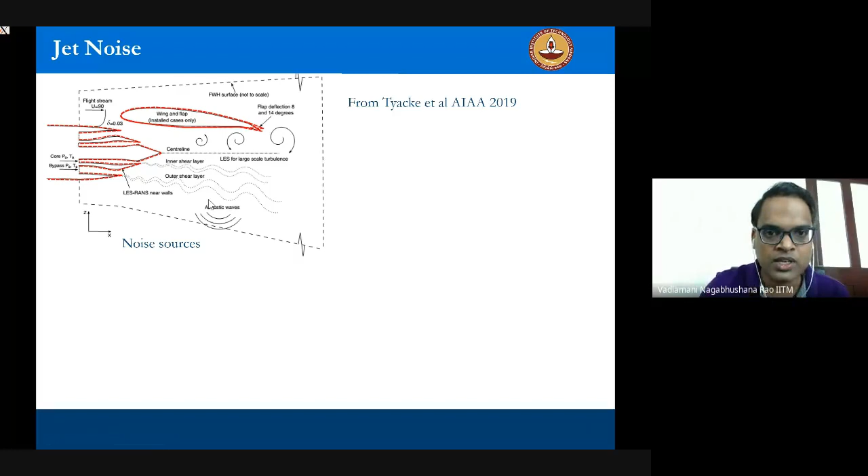You have all the shear layers mixing, and you have a lot of turbulent structures, all the vortices, whatever I have shown in a lot of videos till now. And those also generate pressure fluctuations, which generate the sound, and that is a broadband sound. It will not be like tuck, tuck, tuck sort of sound, it will be just like a zzz, sort of broadband sound.

And even that is annoying. So you can very clearly see how the pressure fluctuations are actually traveling. And here you don't see any specific spikes in the spectra, so you can also capture the broadband noise. That is all about the progress.

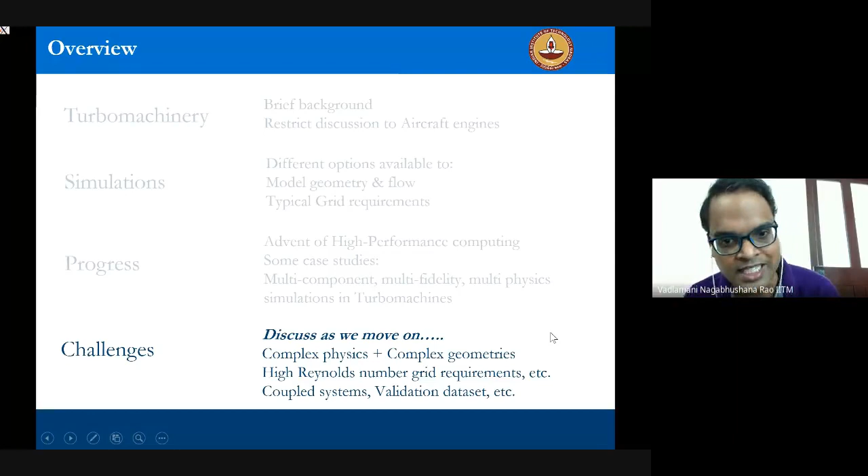I have some 5 minutes left, which is sufficient for challenges. We already discussed a number of challenges as we moved on, and I will just show some examples of additional challenges we have. This is not an exhaustive data set.

When we are talking about such a powerful machine, you have to pay for electricity, cooling, and maintenance. The CDAC facility, when I went there, they were saying they spend around 1 lakh rupees per day for all these aspects. So it's a huge amount of cost involved in maintaining such a facility.

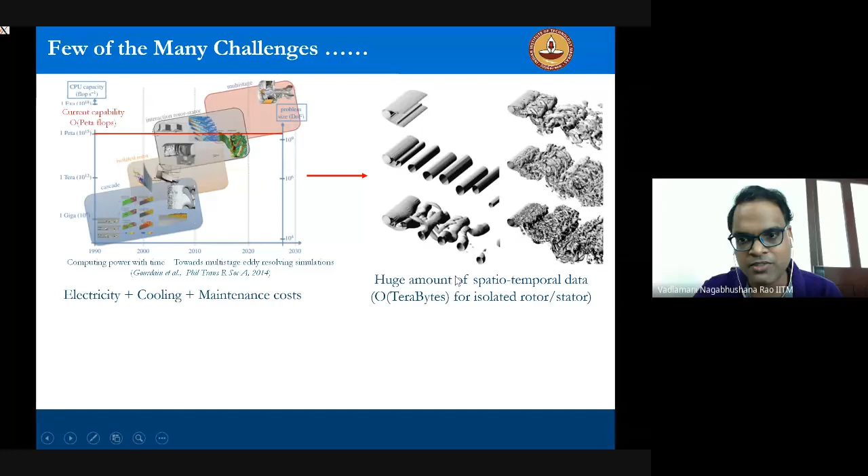Of course, we discussed about resolving, modeling, etc. The more we resolve, the more accurate it is, but we generate a huge amount of data. For a simple rotor stator simulation, I would generate some terabytes of data. I keep buying hard disks of terabytes, and we keep storing that data. So what can we do with that data?

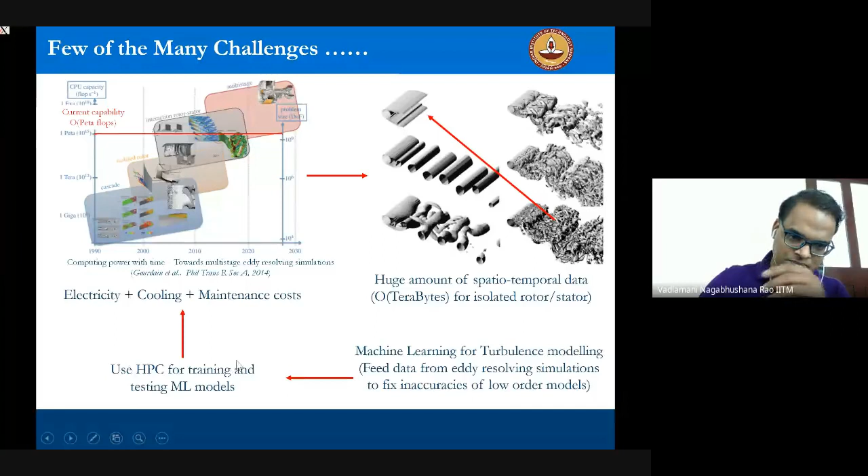The latest trend is to use machine learning algorithms on this big data for turbulence modeling. We have generated huge amounts of spatiotemporal data, and we want to feed this data from these models to fix any inaccuracies in the turbulence models. But even to do this, we need HPC again. So this is like a loop now: whatever data we generate, we use HPC again for training the machine learning models and for testing the ML models, which again costs you electricity, etc.

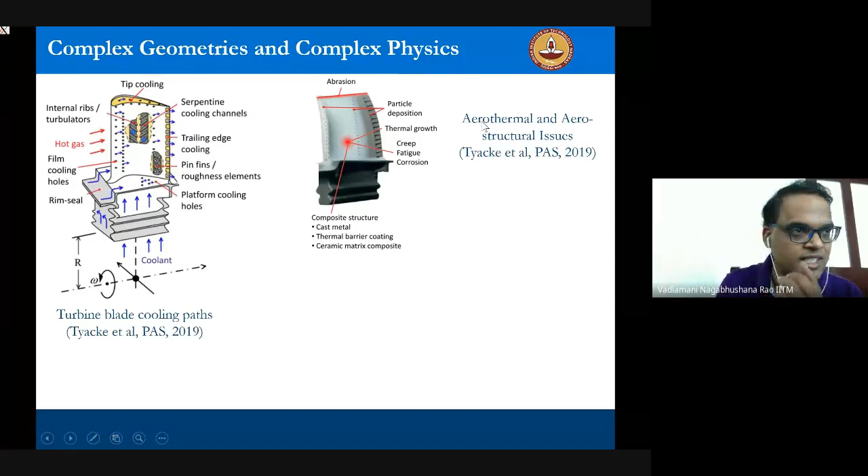The components I have shown are very simple, but here you have a high pressure turbine blade which sees around 1700, 1800 Kelvin, way beyond the melting point of the blade. So you have a lot of advanced cooling technologies over that. How can we mesh all these things and study all these passages? It's not just the aerodynamic perspective we should worry about; we should also worry about the aerothermal and aerostructural issues. That's altogether a completely different domain.

I already gave you an idea about why it is crucial to give some realistic inflow conditions, whatever you encounter in the simulations. And it is very difficult to measure these things experimentally also.

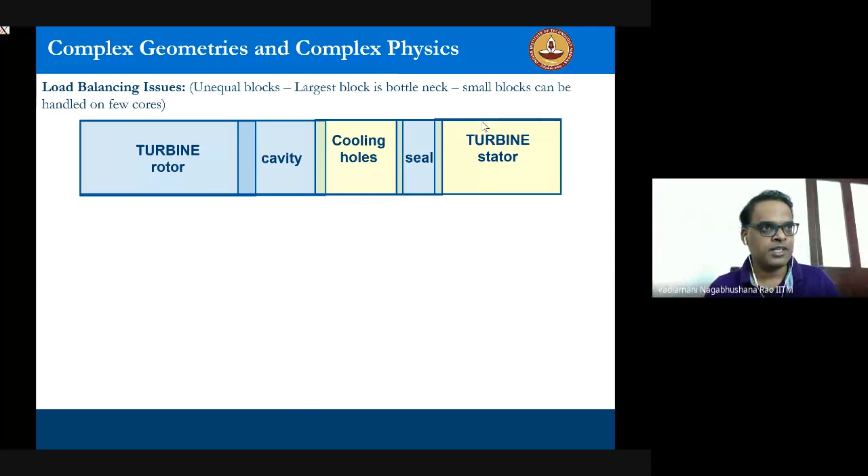Then there are load balancing issues. We want each computer to get its own share of work, but it's not always possible to give equal amounts of work to all the computers. For example, in this high pressure turbine blade, the turbine rotor has some mesh, the turbine stator has some mesh, cavity, cooling hole, seal - the amount of mesh in these regions completely differs. If the turbine rotor has a massive mesh, that's the bottleneck - it takes longer, whereas all these smaller ones finish computation quickly. So we encounter load balancing issues that have to be minimized.

Some codes have this fancy feature of adaptive mesh refinement, which is great - as the flow evolves, the mesh adapts itself. Wherever the gradients and vortices are more, that's where you dump more mesh. But this poses challenges for domain decomposition - how am I going to split this and do it across different processes? It shouldn't be that one processor takes a lot of time while all the others finish their job and wait for communication from that processor. It should not happen like that.

Finally, you can have a RANS simulation here, you can do some LES here, and how do you generate realistic turbulence data across this interface is one more pressing topic. I also mentioned that high order schemes are much better - you can cut down on the number of grid points.

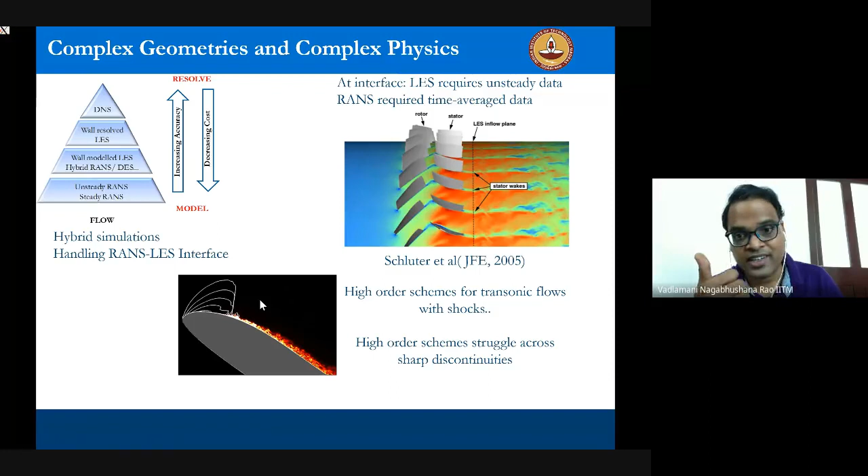High order schemes are great if you are trying to capture all the turbulence, turbulent boundary layers, all those things. But when it comes to shock, you end up with something called Gibbs phenomena, and they become unstable. So stability is another key criteria. High order schemes are great for turbulence but not for shock. So how do you handle these kinds of things? There are many more challenges in this front.

I'll skip the solver development. This is something we were doing in-house, with all the different features of the solver, validations, etc. So I'll skip them.

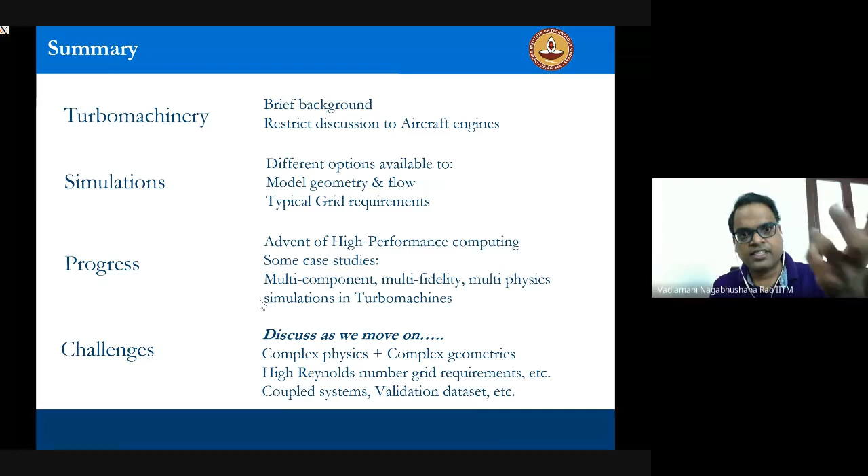To summarize the talk, we looked at turbo machinery, a brief background, restricted ourselves to aircraft engines. We looked at different simulations, what are the options for modeling the flow, options to model geometry, grid requirements, what was the progress in terms of HPC, and some case studies on turbine, fan intake interactions, plasma flow control, tonal noise and broadband noise, and some of the challenges we still encounter. There are many more challenges actually.

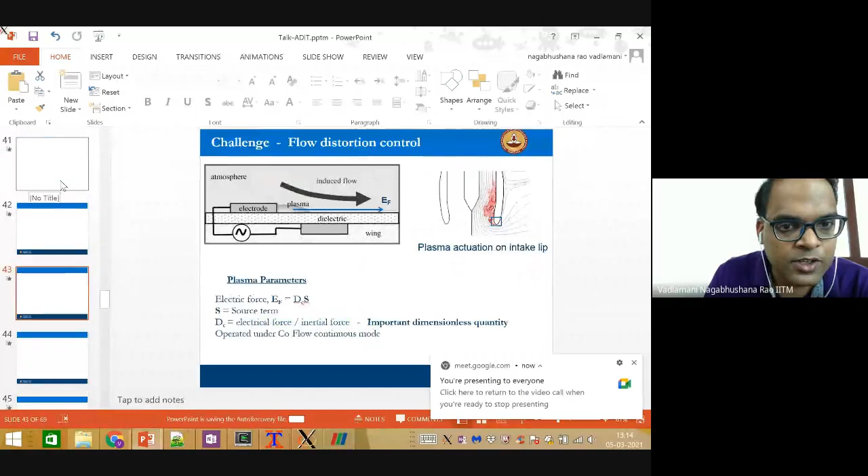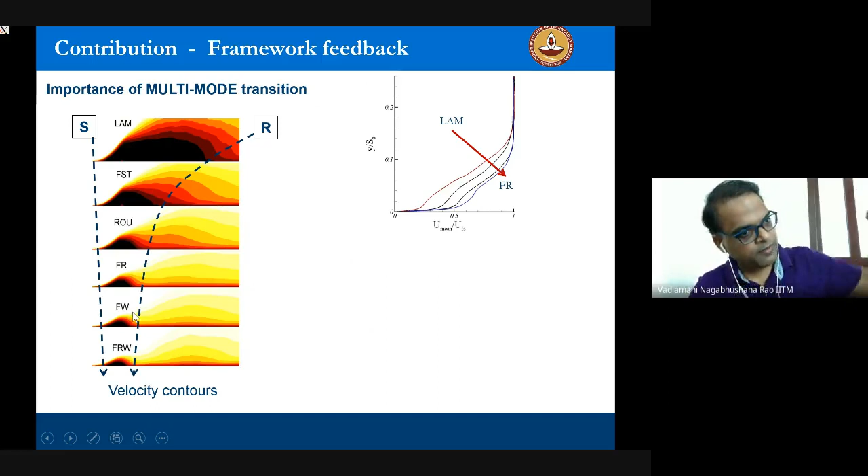It's a different combination of the upstream instabilities which I had put. Let me go back to that slide. LAM is laminar inflow, where there are no disturbances. I told you there are three different disturbances: free stream turbulence, wakes, and surface roughness on the blade. So if it's a laminar flow with a smooth wall, there is no incoming free stream turbulence, no incoming wake, nothing - that is laminar flow. FST is just free stream turbulence alone. The second one is we only have roughness - only the blade is rough, without any free stream turbulence. FR is a combination of these two, so I have free stream turbulence over a rough wall. The next one is free stream turbulence and wakes, so periodic passing wakes. Then FRW is all three combined: free stream turbulence, roughness, and wakes. Does that clarify your question?

Yes sir, yes, okay, thank you. Any other participant having any question?

Good afternoon, sir. Sir, in your slide I saw machine learning. What is the use of machine learning in CFD, sir, and artificial intelligence? Right, okay.

Sir, your voice is not coming. Hello. Your voice is not coming clearly, sir. Hello. Hello? Sir, your voice is still not audible. No sir, it is still not coming. Sir, one time plug out, sir. You can try to plug in and plug out your earphone. Is it better now? Yes sir, it is coming. Yes, sir, okay, audible, fine? Thank you.